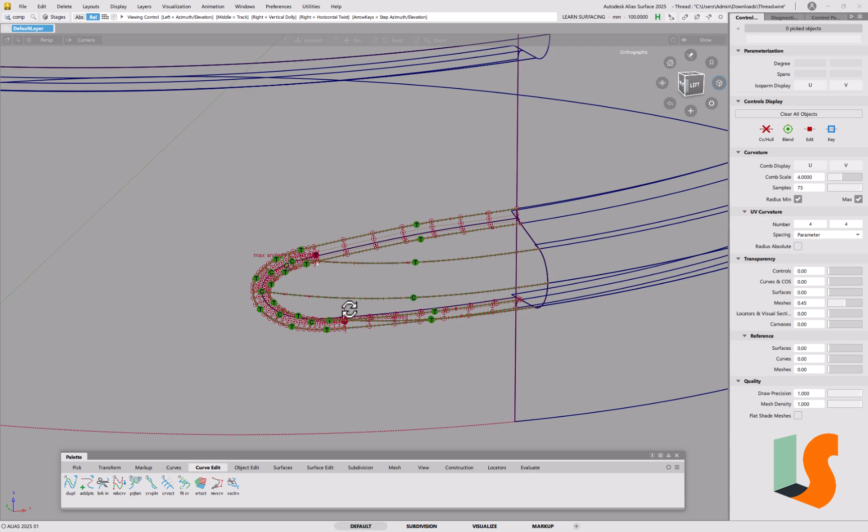This is an example of some filleting, and the question is, how do we get this to align? First of all, I'm just going to create a new layer, and put the stuff we are interested in, which is just this area here, and we can remove the rest of it.

So I'll put that in another layer. Probably did that round the wrong way, but never mind. Okay, so we're just looking in here. Also notice you get these light symbols here, which you don't actually need, so I'm just going to toggle those off. They're just interfering with our view.

So this looks really good. Everything's aligned apart from those two ends. Now the big, oh no, I've just spotted something. There's only position here, so let's go and have a look at that first of all.

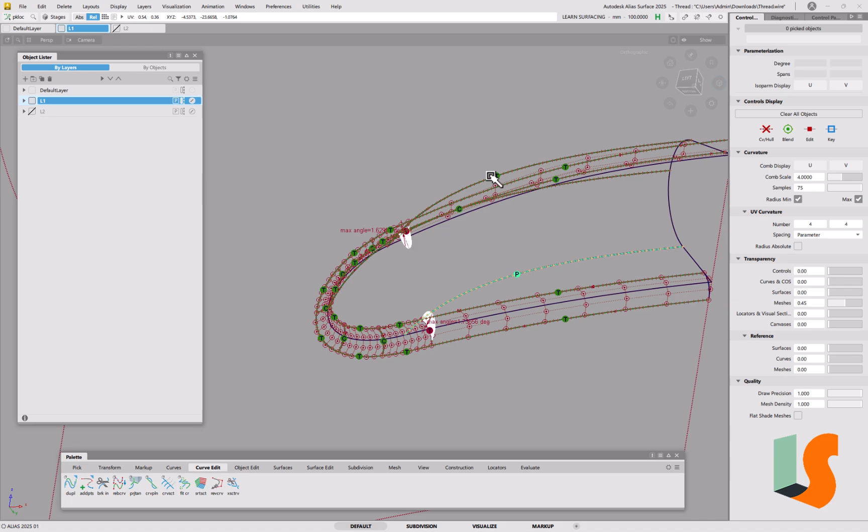And then I'm going to go into the information window, and I've got a hotkey of I here to save me a bit of time. So if it just says P and I want to find out what the tangency is, I can actually go into here.

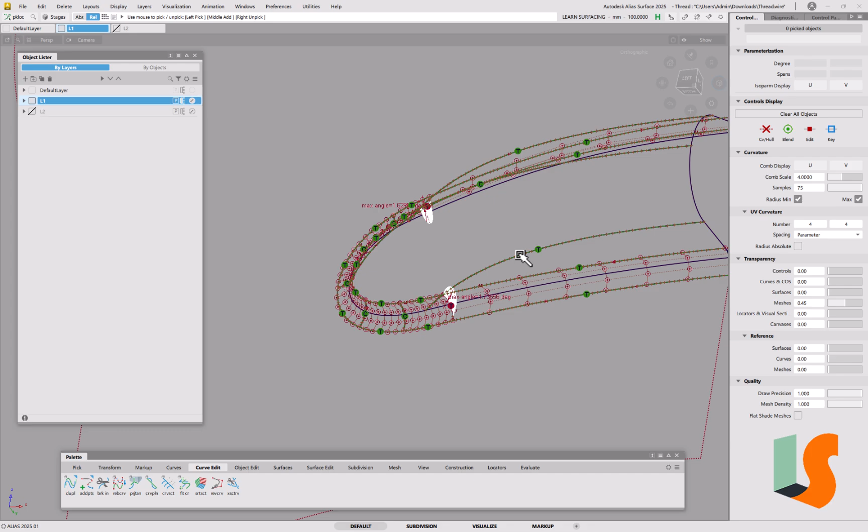So tangency wise it's okay, it's just the locator there wasn't quite correct. Now I'm wondering if that's curvature aligned. It isn't. So there's nothing wrong with that if that's what you wanted. So if you want tangency there, that's fine.

And I noticed that these fillets are tangent aligned. Again, there's nothing wrong with that at all if that's what's required.

When you're running a fillet over another fillet, you will find that if this is only tangent, so you're running this edge across a tangent edge here, then you will have much more difficulty trying to get that to align than if that was curvature aligned, or if it was G3, it would be even easier.

It seems counterintuitive, and when I started filleting many years ago, or surfacing many years ago, I used to think that if things were tangent, surely that's easier than G2, but it's actually the reverse.

So if you have a choice in the matter, if you can make that G2, that would be so much better, because then you won't have so much of an alignment problem going across here.

So we'd expect these to be all tangent around here, which they are, and we've got curvature alignment on the ends. Now when you get to this end here, if we can get tangency there, we'll be lucky.

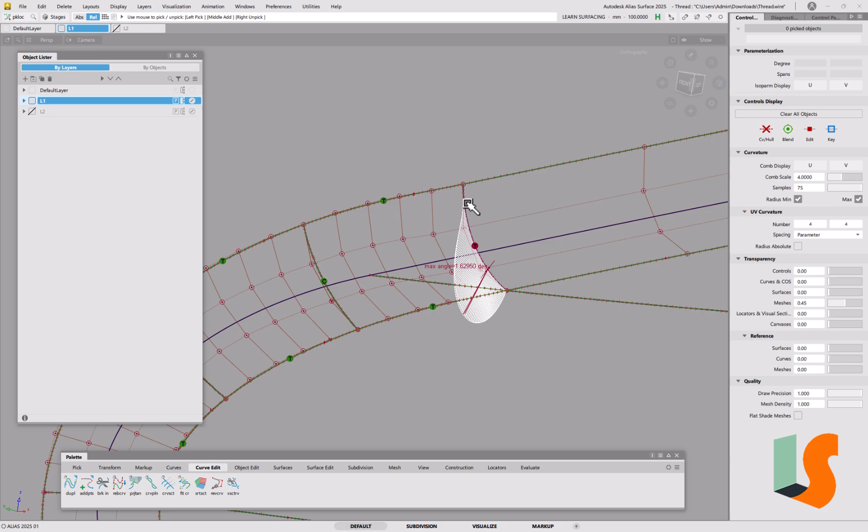And even if this is G2, you'll often find in this situation that you can only get G1 across that end, and as long as the highlights look reasonably okay, then it's okay.

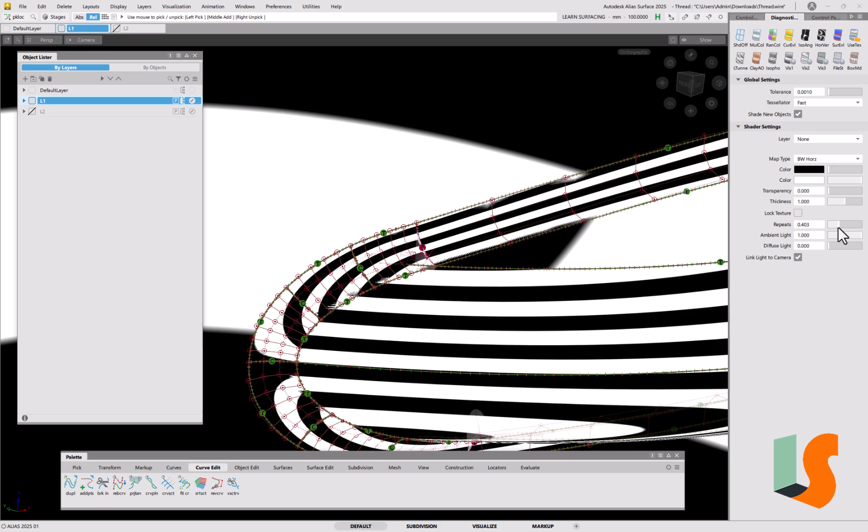I mean, here, because we've got tangency only, if I go into the highlights here, let's put those ones on, and I'll just reduce the number of repeats, so we've got a few less lines. You'll see that because we've only got tangency, we won't get continuity of the curvature across this boundary or the highlights. That's not wrong, it's just a feature of it being tangent continuous.

If it was G2 continuous, we'd expect that to flow across. You can see the same thing here. The highlights will come in and go off at a different angle, and that's why often you want G2 continuity. But it all depends on the size of the geometry and lots of other factors, like who your boss is and what they want you to do, basically.

So I'm going to persevere with this, but just to let you know, this is going to be difficult. So I'm making my excuses in advance, but this is a very difficult situation.

In fact, it's probably going to be impossible to get tangency across there, and the reason is partly because we've got tangency only on the edges, and like I say, if there's G2 everywhere, we're more likely to be able to get tangency there, but G2 is unlikely.

But the other thing that's happening here is that this edge comes along here and then goes off at a different angle. Again, it's sometimes unavoidable, and in this case it may well be unavoidable because we're coming in at quite a shallow angle here.

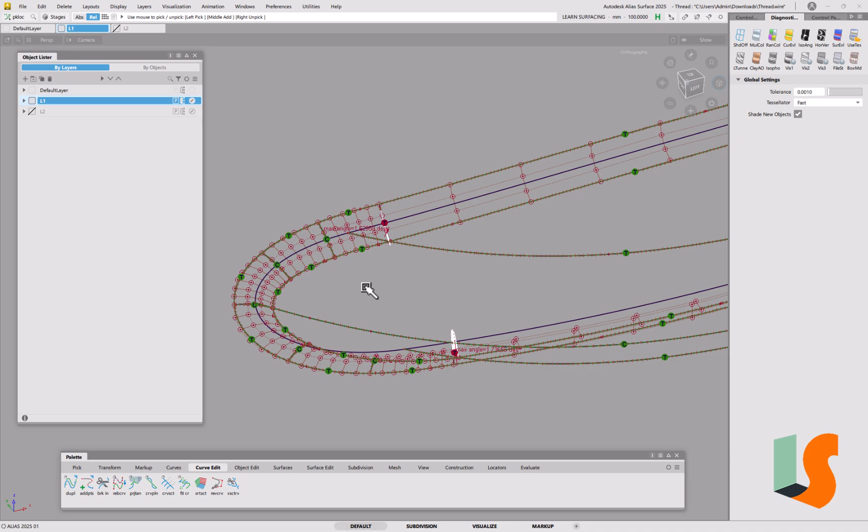If we had more of an angle on there, then what I would say is that we should actually make this edge flow into this one, so we could make that go across. In fact, that's probably going to be the only solution where we're going to be able to align that.

Now if I just want to try, I mean, I'll try and align this, and I hold out very little hope of doing that.

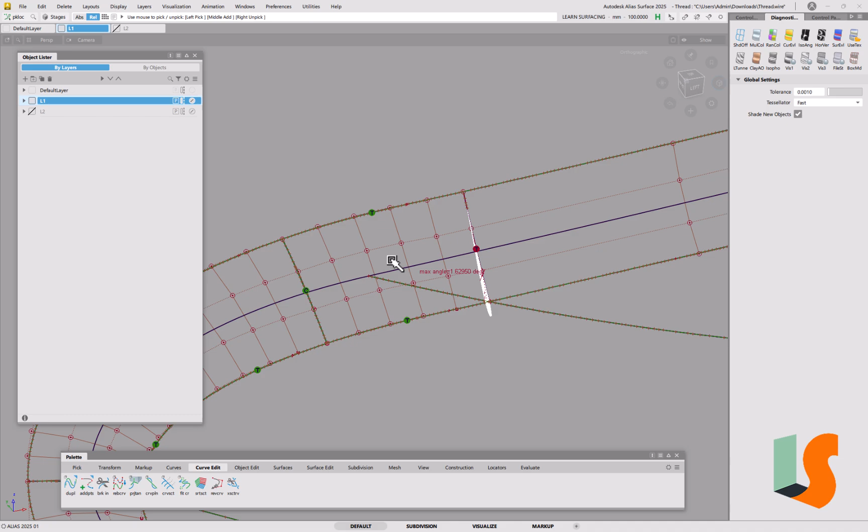One other thing we can do is, you notice the degree along this way is only 5, which is what the fillet function gives you. If you want, we can increase the degree to 7, that's usually the limit on what we're allowed to do. Now I'm using Alt and D here, very worthwhile knowing, because you can go up here and change the degree, but I can also do it here.

I can never see, or very rarely see, the symbols, but there is a U and a V symbol, I can just about make it out there. So I think the U direction's that way, which is this one. But I can't always see it, so I just guess which one it is. If I'm wrong, it doesn't matter, I can just undo it.

So first of all, increase the degree, and also hit the space bar, that would be very useful. Hit the space bar, and then we're just going to try and align that, and I don't think it's going to work. But when I align it, obviously it's only G1. That's the maximum I'm anticipating being able to do. Very unlikely you'd get G2.

You wouldn't be able to get G2 on this situation. You might if these were G2. If they were G3, I would expect to get G2 across there. But here we're going to go for G1. If we can get G1, then I'd be more than happy.

So we're going for edge because it's edge to edge here. If you put project on by mistake, then what happens is you create a curve on surface there, right on the edge of the surface, which you do not want. So always have edge on.

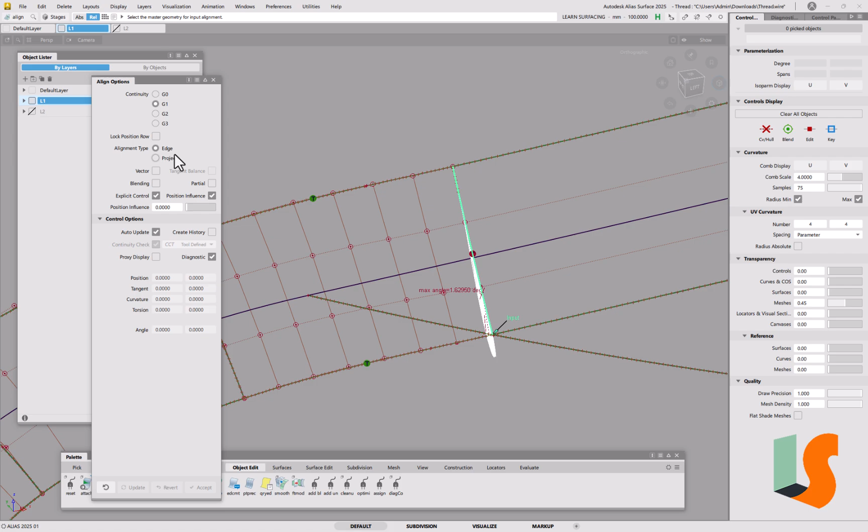Align is a really tricky function. You have to always keep your wits about you as to what settings you've got. So edge - I'm going to go and align that into there, and you can see that it's aligned it, and actually it's kept the alignment on that edge, which is good. But on here, it's thrown it off completely.

Now the other thing is to make absolutely certain that these CVs join up with the CVs on here. I need to put position influence of 1 on. I mean, it won't make any difference here, it looks like they're actually bang on anyway. And the other thing is that you tend to get a better alignment when you've got edge on, which I've got on here, or edge align, because the angle is about 1 degree there.

What I could try doing is changing that edge into skew. You can see it says start there and it says end there. So in this menu, I can go to skew, or I can do it here. I can click on that there, just in case that makes any difference. It's not made any difference, so I'm not going to worry about that. I'll just keep it on edge align.

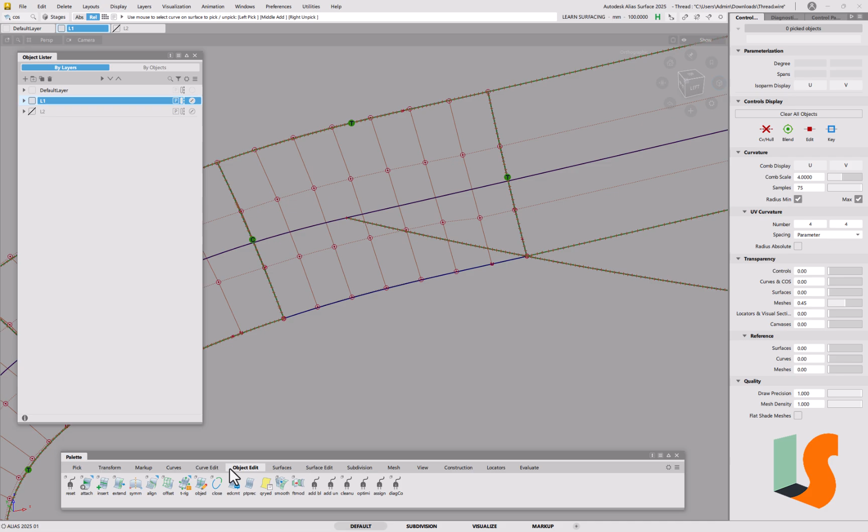Now, obviously we've got no alignment there, so what I'm going to do is pick that surface. Now that surface hasn't been trimmed, so we've got a curve on surface there that we can delete. So I'm going to delete that, and then I'm going to try again. I don't hold out much hope of this at all, but I'm going to go for G1, and I want to align it into this surface here.

So this is where we would use project, and I'll use project into the view in this case. So it's going to move those CVs only in and out of the view, and then I'm going to try and align it that way. And you can see immediately it changes the degree that way, which is what I was expecting it to do, to be honest. So it's actually made it a lot worse.

Now one thing you could try here is increasing the degree, because you can see that makes it more localized, and I can go up to degree 7 if I want to. So these surfaces here where you're going across this edge, that might be another possibility, is that we could do that. I don't really like that, because it doesn't really show the intent of that surface. Having that as degree 3 is quite clear that it's tangent.

Even without the symbols on, it must be tangent on both sides, that's all it can be. If it's degree 5, you know it's going to be probably G2 on both sides, even without the analysis on there.

This one, we have no idea, because it's a higher degree. So I don't really like doing this, but sometimes it's just what you have to do. And I still don't have that much hope that this is going to work either, but I'm going to try this. So I'm going to align it that way with project on, and then I'm going to go back to this edge, and you're often going backwards and forwards between edges, and I'm going to align that again.

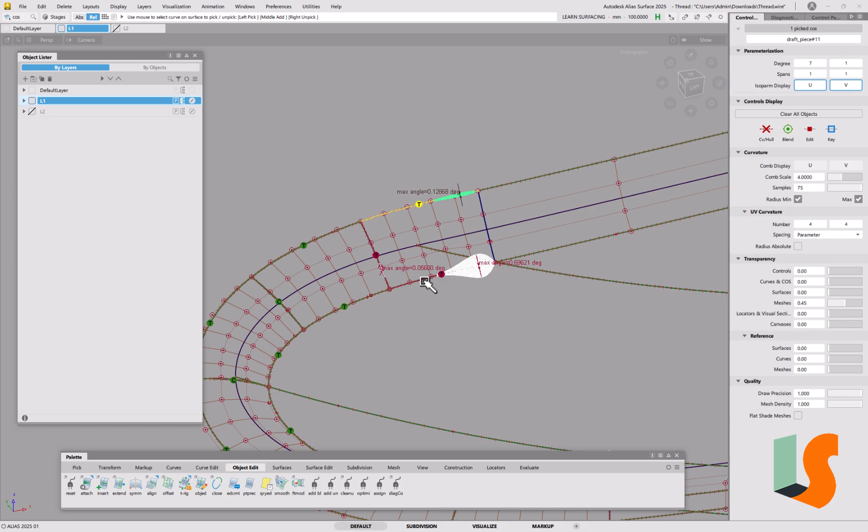So the other option that we've got, I mean, I'm avoiding at the moment making that edge flow, but that's the best solution in a way. But I want to try and use a sort of sledgehammer approach, which is what this is. When it comes off at that angle, this is a sledgehammer to try and fix this. So we're going to try and detach this and make this a smaller fillet. So do something like that.

Again, it's not very nice, and you will find when you look at this that these CVs, if I do get this to align by some miracle, the CVs here will be quite horrible going across that boundary, and the highlights will be quite horrible, but at least it will align. And so let's just try and do that again. So I'm going to start off by, let's align this end first of all. So I'll make sure I've got edge on, I've got position influence of 1 on because I'm edge to edge here, and I haven't got history on. And then we're going to align that end to there.

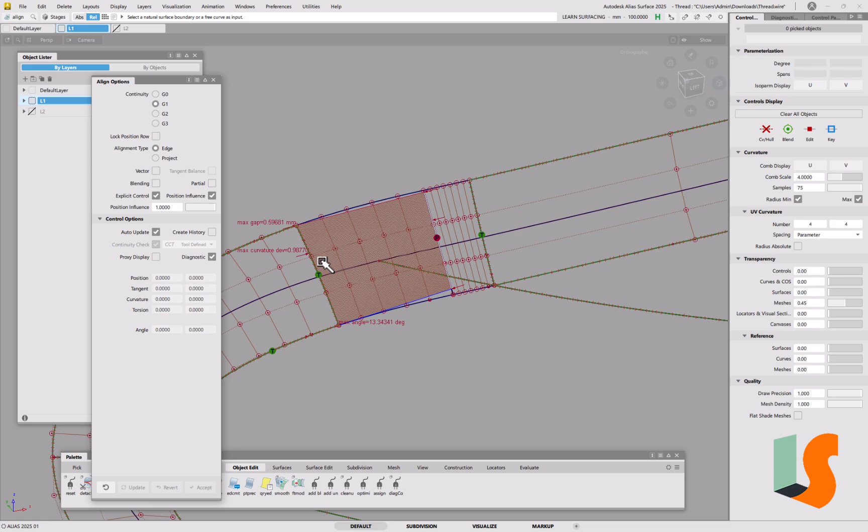Now this, I'll explain what has happened there. On this end, this surface here, we can make that degree 7, and we should do, because we'll need every single CV that we can get around the area to get this to work. Now what's happened on this end is, because I've used detach and I had a locator on the end already, the system is confused. So it thinks there's a position that this end and this end are connected, which of course they're not, which is why we've got a ridiculous display here.

It's saying the position, if we can find what the gap is, it says 0.6 of a mil. So this is tiny geometry, but it's saying the gap between there and there is 0.6 of a mil. We're not interested, and it's just because we've used detach. It always happens like this. It's not intelligent enough to actually know that we've detached it and that it should update the curvature here.

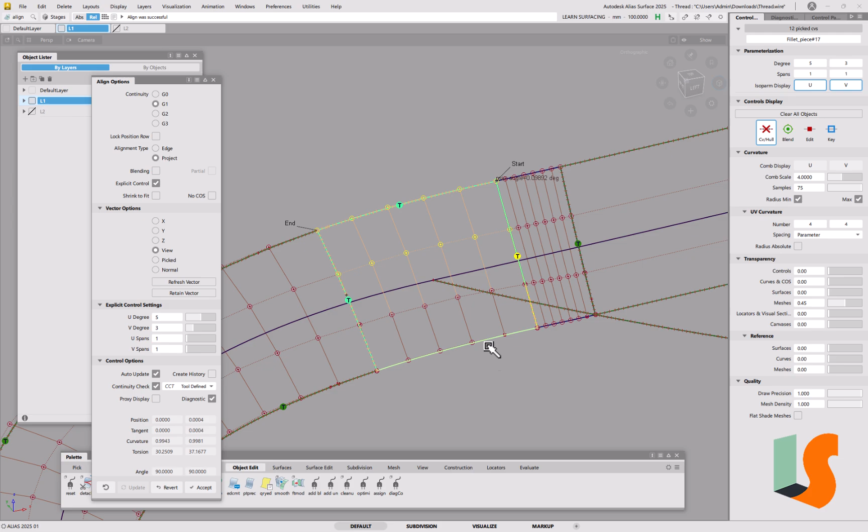So what I'm going to do there is put the curvature analysis on there, just so we can see that that's still continuous. I know these edges, we haven't got a curve on surface there, so we need to go and align those. So I'm going to do the one that should be fairly easy. So I'm going to have G1 project in the view, that one there, and this one here. So that should all be fine. So now we've reduced the problem to this area.

So I'm going to go back to edge. So we've got to have our wits about us as to what's going on here. So we've got to have edge here, not project, otherwise this will fail. So at most I'm going to try and get tangency. If I can get tangency, then on that one, curvature would be no problem. It's this one that's going to be the problem. That's only going to get tangency.

So on these edges, again, I've got to make sure I'm picking all the right options in here. It's not easy. So we're going to project that one onto this surface here. That one is no problem because it's not going across an angled edge. And so this one, let's see if that one works.

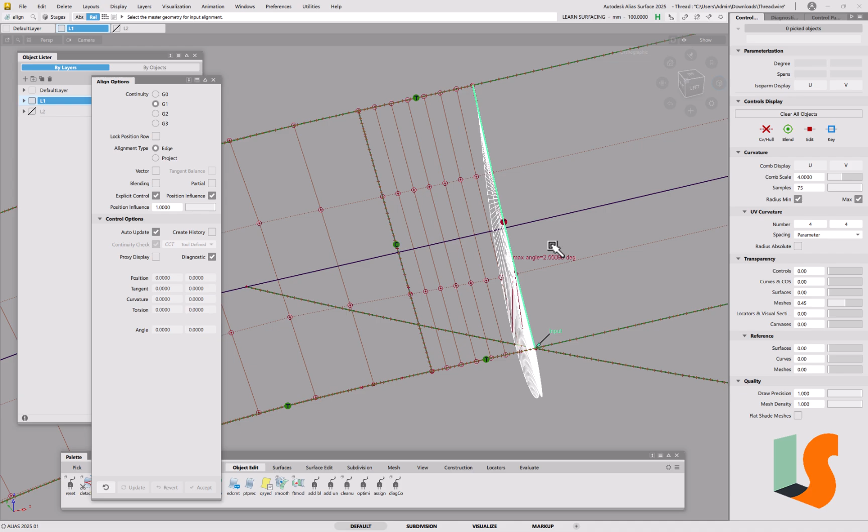That's even worse than when we started. And what we could try there, so I've got project on with view on. Okay, yeah, so let's go back to this edge. Now this will be very sensitive to these CVs, you can imagine, because this is such a small distance here. The tiniest movement of those CVs will affect that edge. So let's try G1 on that edge.

In case you're wondering that this seems like a very long-winded method, it is, and there's no way around this. This is how it does things. And whenever you've got an angle coming off like that, this is what's going on. But the good news is we're now down to 0.25 of a degree on this edge here. So we have reduced it significantly.

We can also try just increasing the degree. So I'm going to put history on here, with auto update on, because then as I do this, it should update. Although, no, it's not going to have any effect, of course, is it? So on this edge, let's just go for degree 7. Because there's every chance that we'll need degree 7. If we don't, we can just back off that a bit. Now, so we've just got this 0.25.

Now, usually, if I delete that curve on surface, this is the way to do it. Usually, the way is to delete the curve on surface and then to use project again. If you don't delete the curve on surface, then you end up with multiple curves on surfaces, and then you get confused about what's actually going on here. Now that's not actually helped there.

We could try changing the projection type. That's marginally helped, but not very much. So normal is just doing it normal to the surface locally there. Now that hasn't helped here. So what I'm going to now try and do is, what we could do is make this surface here even smaller. Let's go into locator.

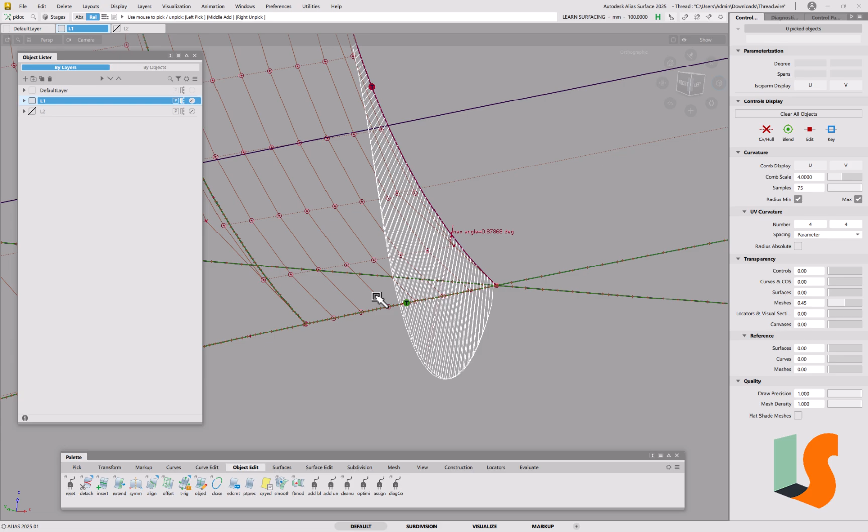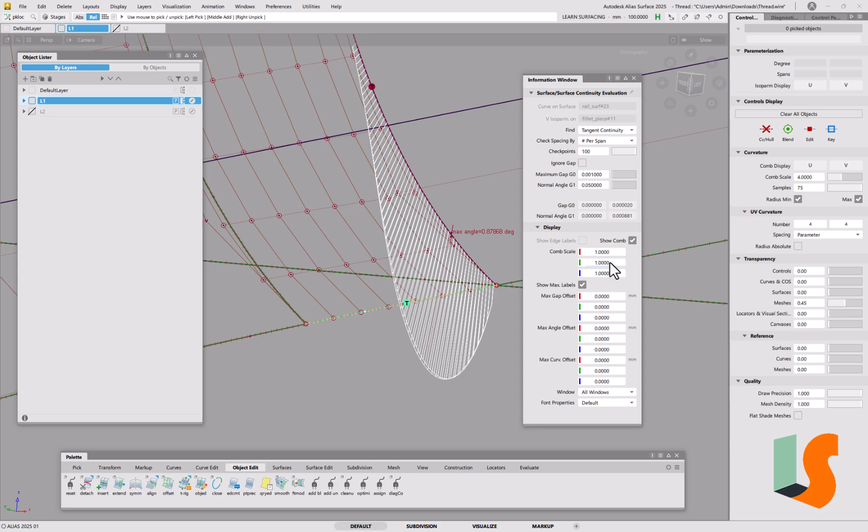So I've gone into locator. Sorry, I didn't explain what I was doing, but I've clicked on I to get to the information window, which if you don't know where that is, it's under Windows, Information Window. But if you make it a hotkey I, it's just so easy to get to, and it's so useful. Now on this edge here, I've picked this lower edge. I want to see what the tangency is doing. So I've got this scale option here. I'm going to leave that alone for the time being.

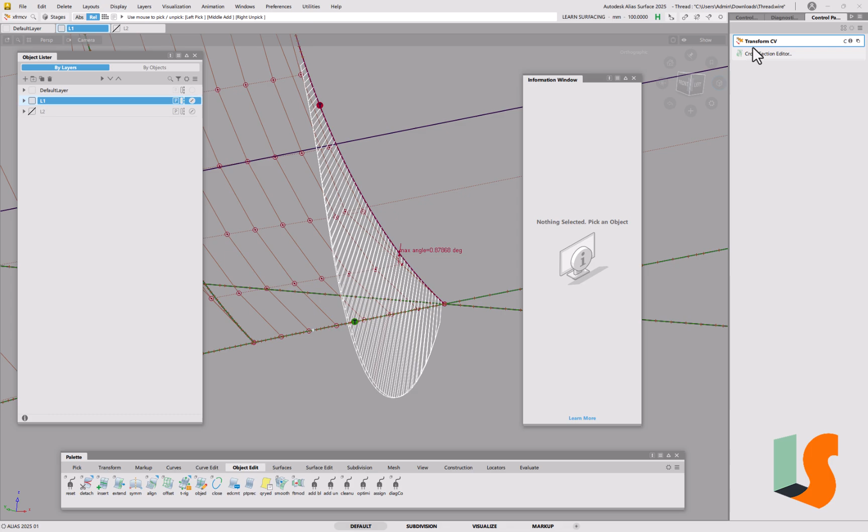But if I go into transforming my CVs, again, I've got this on a hotkey C in my case. If I don't tell you what I'm doing, it's under here, Control Panel, Transform CV. So if I click on C and then press the space bar, I get the function up. So I'm going to put on lots of mouse sensitivity, and I'm going to move CVs normal to the surface, and I'm probably going to have a lot more than that. Let's go for 1000 as my mouse sensitivity.

Now if I click on this point here, that's going to affect tangency that way, and also here. You can see the worst tangency on this end is here. This is the problem, that trying to align it in this direction is affecting that point, trying to align it in this direction is also affecting that point, and the two are battling each other. So let's see what we can do if I manually move that.

Can I keep this green? It won't. It's definitely not going to happen. It starts to deviate there. But maybe if I get the angles about the same on both sides. So I can't move that point anymore. It's affecting that side, and I'm about the midpoint of the two.

So I'm going to move along to the next one, which will also influence that, but by a lesser amount, and I might be able to get rid of some of that angle. But of course, what then happens is I take it to a point where it starts to move up here. So you then end up going to the next point, and it's a bit like trying to sculpt a balloon, where you push one bit of the balloon and another bit of the balloon pops up.

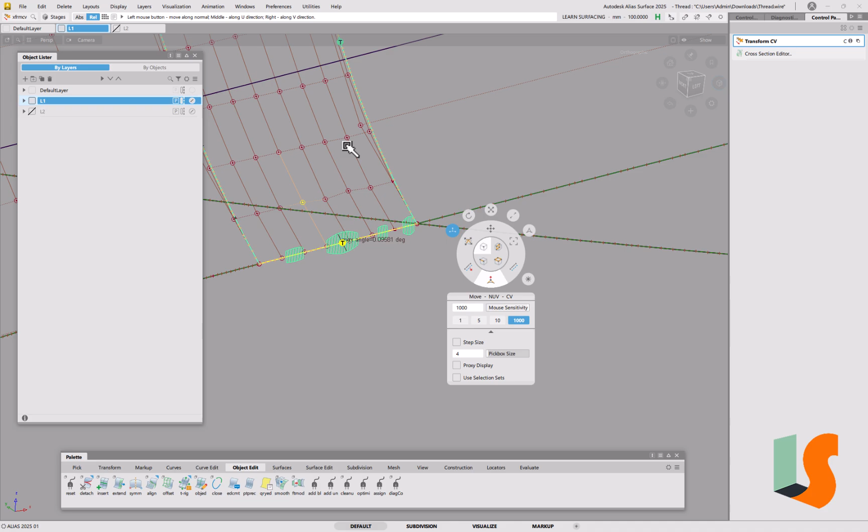But if you want to keep that curvature, of course, you've got to avoid the first 3 CVs. You can only move this one. It's the last one you can move. So it becomes very problematic. So I think if I spent another hour or 2, I might be able to get that to work. I'm not going to even bother to try the other one because it's the same principle. Now, as I say, the other thing we could do is just make this even smaller. So if this wasn't working, I might give up at this point. I'm dangerously close. It's less than 0.1 of a degree here.

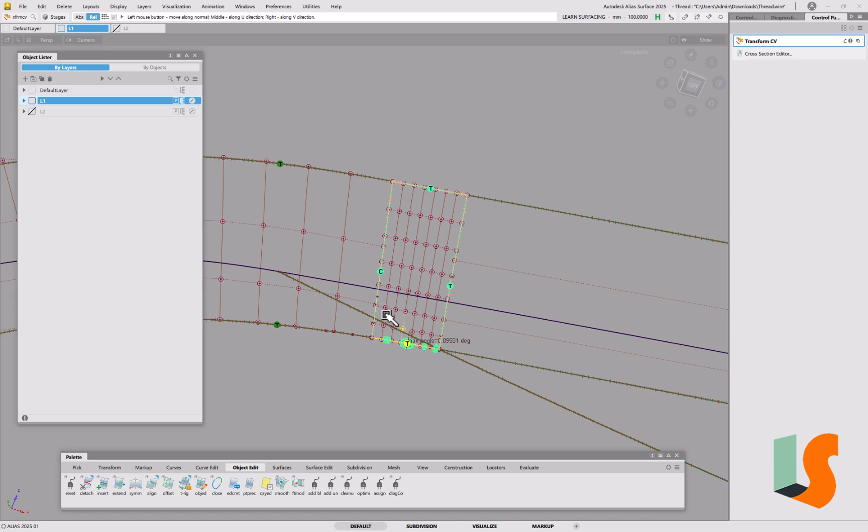But if I really have given up on this now, it's too much manual effort, then what we could do is just ideally go back to the original surface, or we could, if we wanted to, let me just save this somewhere. So I'll just call it thread 01. So if we've got to that point and we thought, oh, I can't be bothered to do this anymore, this is not working, what we could do is extend this backwards, so I'm using extend here, and then we can extend this. Obviously the diagnostic there isn't then right.

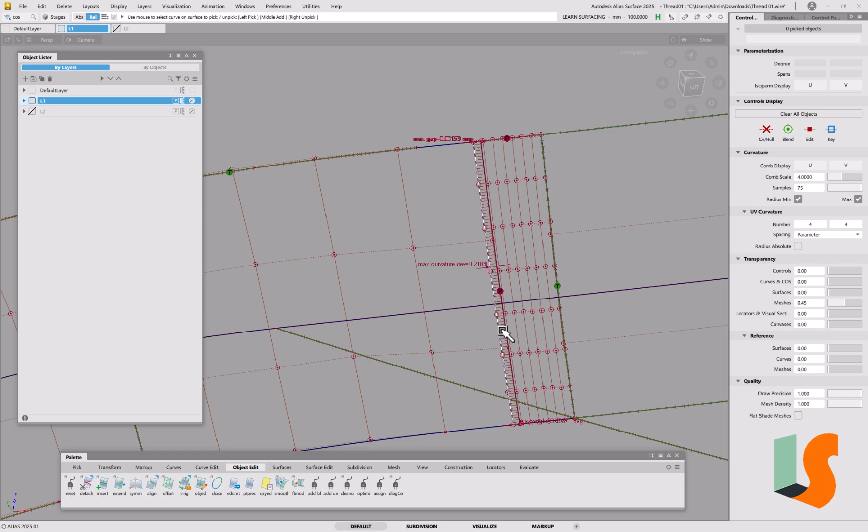Also the curve on surface here, we've got a curve on surface which goes across from here to here, not very easy to see. If I put edit points on the curve on surface, you can see there's an edit point there and one there. So we actually want to get rid of that. And we also want to get rid of this one because it doesn't line up with the edges that we've got. And we've also got overlapping edges, which I've done deliberately because I want to trim one back to the other, or trim convert it. So let's go into surface edit, and I'm going to do a trim convert.

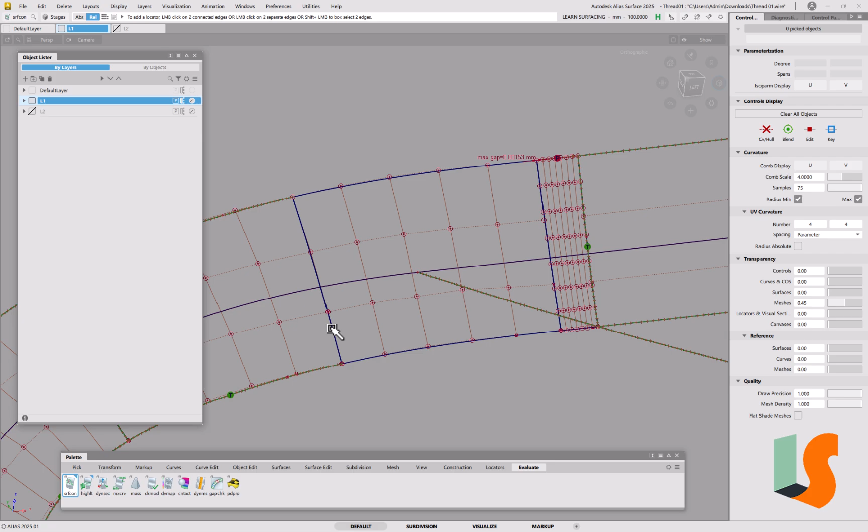This one, project in the view, or normal, doesn't matter. So we've trim converted that, so we've got a new surface there. Now the chances are that won't be entirely aligned now. So I'm just going to go for tangency there. Oh, again, on this side, we've got a curve on surface which only goes to that point. So it's really important that we get rid of these old curves on surface. Otherwise you end up with multiple ones which are really not very good.

Thinking about it, this needs to be curvature, doesn't it? That's what we were working with. So I'm using the information window there just to change it. So we haven't got a curve on surface there, here or here. Now I've just trim converted that back to that edge. So I've just made this smaller, so that hopefully we'll be able to align that. Let's go into surface continuity here. See if that's got curvature. Very unlikely.

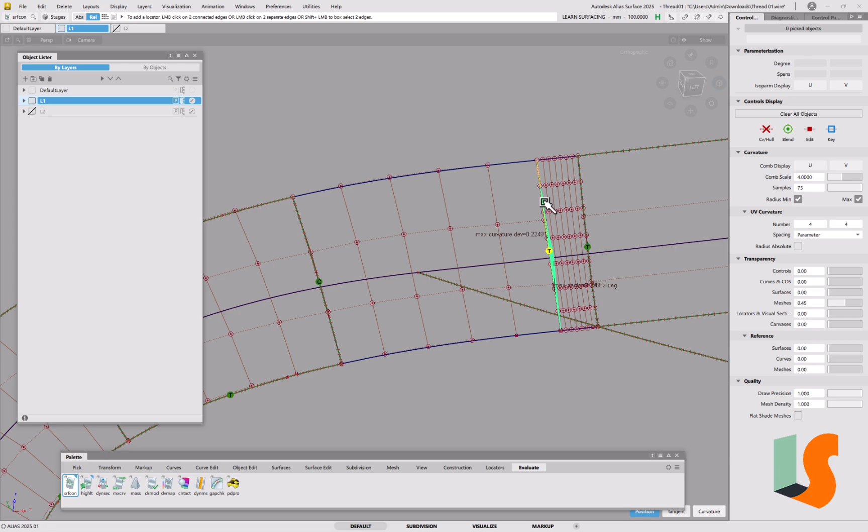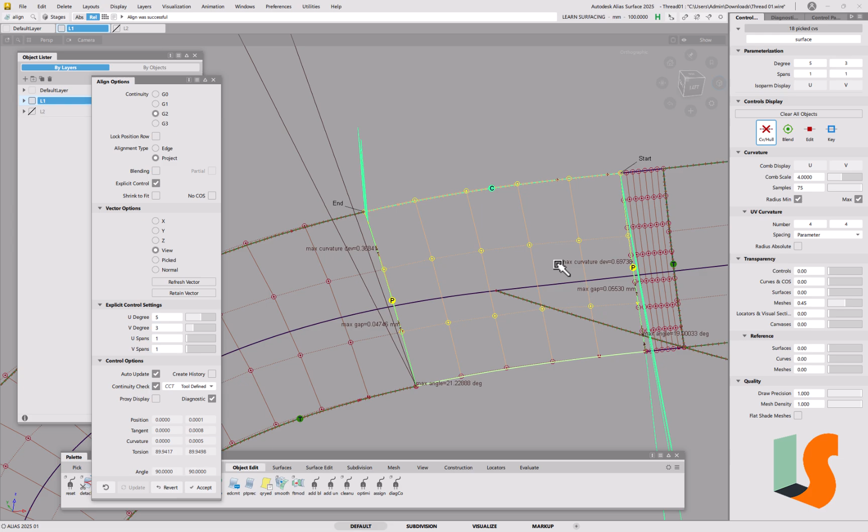So I'm going to first of all align these edges here. So let's go into align, and this is going to be G2, project in the view, that one. I've left curvature on, so we've got all sort of dubious analysis going on there, which obviously we don't want. We want it on G1 only. See, all of these things you've got to remember all of the time, which is a tall order. It's not easy to do.

Again, this one's G1 into those edges there, and then I'm going to use edge on here and align that with curvature that side. So this tangent is worked out there. We've still got this error on this side. So G1, not surprisingly, G1 into here. Now this should be a lot closer to start with. Now it's down to 0.14, so by making that smaller we've got closer to a solution.

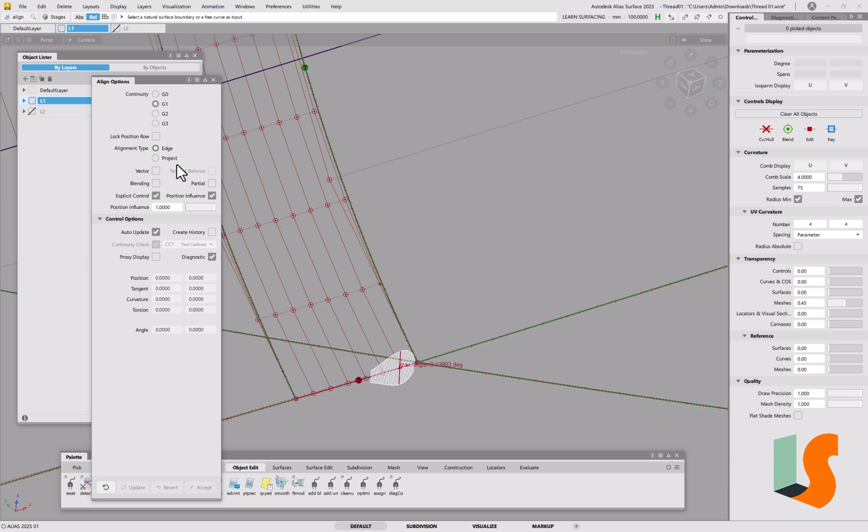Now before I said usually the best result on an edge like this into another surface is to delete the existing curve on surface and then use project, but sometimes edge will work, but I can't tell you when. It's one of those that you've just got to try. So let's just do G1 edge and just see if this works. So it's not working at the minute. Maybe if I change the position influence down to 0, it might improve things, but no. But there are times when that works. It didn't make it any worse anyway. It's still 0.74, which is what it was before, I think.

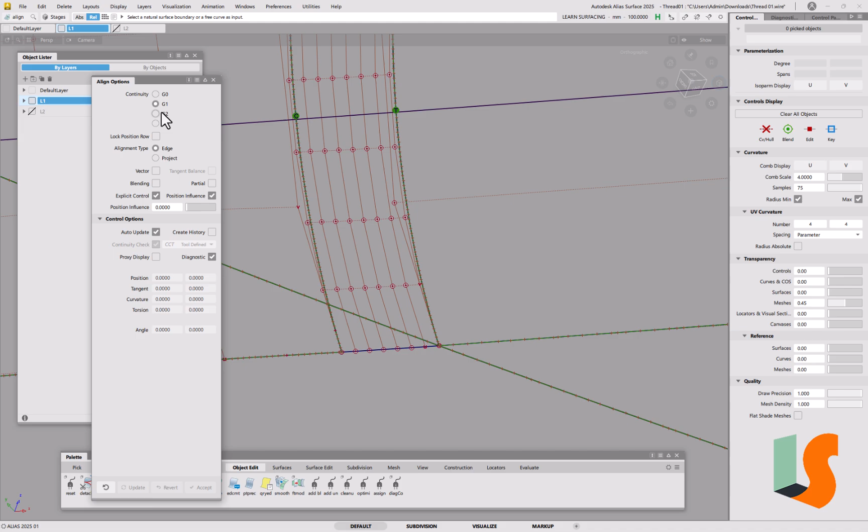So let's just get rid of curve on surface there, and then this is going to throw this edge out. Of course, G1 project there, and I'm going to do it from the view. So it's actually made that worse, but let's just live with it. So now I can't remember. I think it was better when I've got that aligned. So it's an iterative process. There's no magic button that's going to give you this. So that's got down to 0.13. So that's dangerously close. This is aligned. So let's go with this.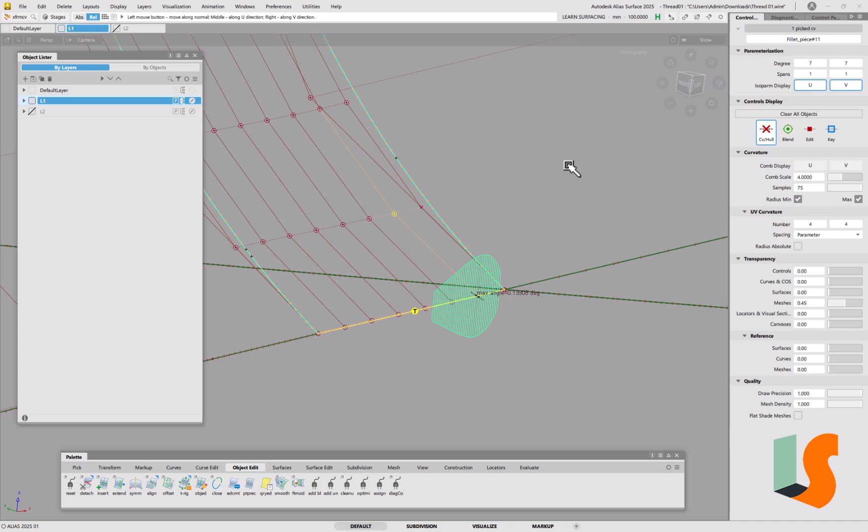And then we're going to go and start moving CVs around again with lots of mouse sensitivity on. So the first one there is where the maximum error is. Now I've been moving this point normal to that surface. There is another way we could move this, which would have an effect, and that's to move it left to right, which if we moved it left to right by sliding it, then it has some effect on here, but doesn't have any effect, or very little effect on here, because we're not moving it up and down. So I could try that.

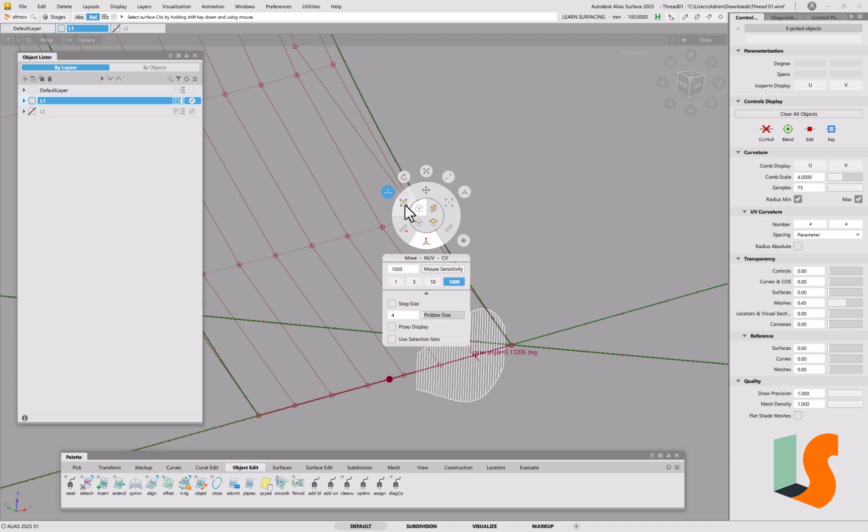I'm not holding out any hope really that this is going to have the effect that we want, but let's just try sliding that along. Now we probably have to put a lot less mouse sensitivity on that way, but sometimes that can affect things. But you can see I'm having to move it to a silly point there, which obviously we don't want, so it was worth a try.

So let's go back to moving it normal, and I've got to put lots of mouse sensitivity on here so it slows it right down. And I'll do what I did before, which is try and sort of balance it. So I've got about 0.2 on both sides, and then we can move along here, see if we can push that down to where we want it to be. It seems to be going, hopefully, in the right direction. Now it's popped up a bit further along, but we just counter that by moving the next point along. We're still struggling.

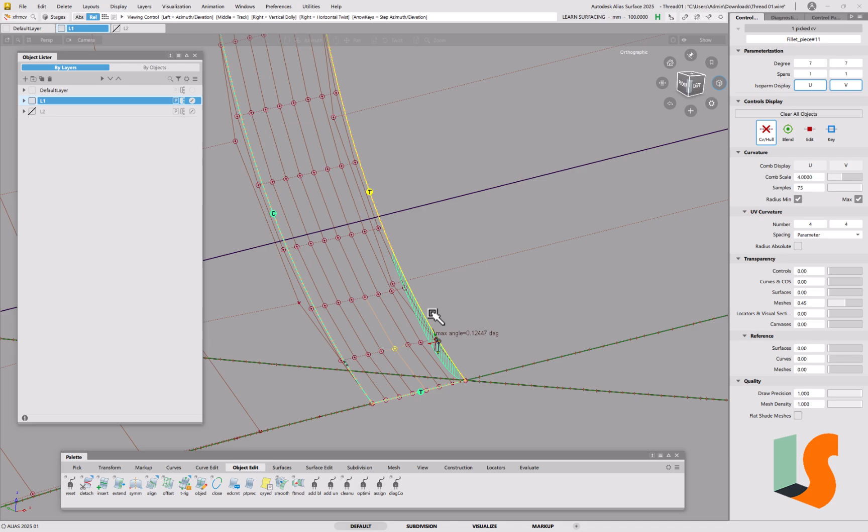What I'm going to do on the lower edge is do the other way of doing this, the better way of doing this. I mean, part of the reason for showing you this is to show you how tricky this is and how you don't want to be doing this. But the thing that I am not showing you is that if this was G1, this would be a heck of a lot easier, especially if you just accept the fact that you want tangency there. You'll find it a lot easier.

If you can do it with G1, then it'll stand you in good stead for being able to do it with G2. So I'm going to try and keep pushing that and pushing it until this goes here, and obviously this is gone off now. So we'll move that over here, see if we can just get rid of that.

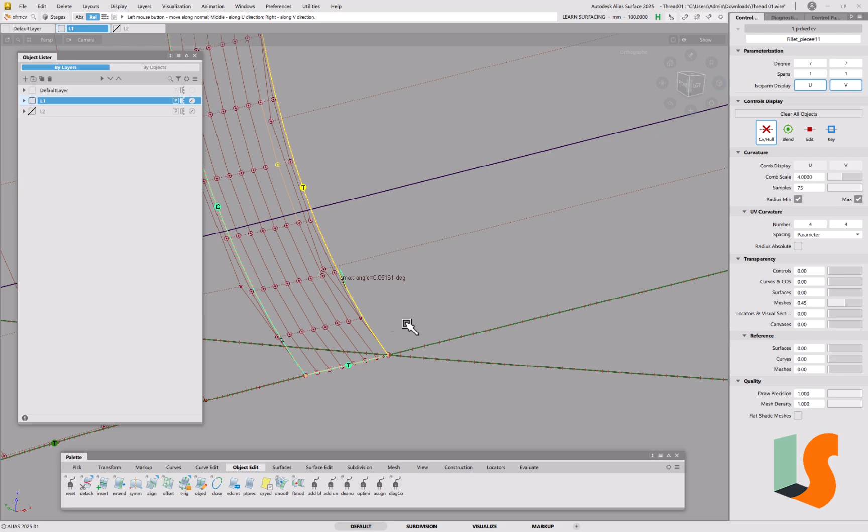And then it moves even further away, but now we're almost there, I think. Oh, there must be a little spot there, 0.051, so we're almost there. Now if it starts to flick from one direction to the next, all you've got to do is put more mouse sensitivity in. So let's make that 5. I've made it 50,000. That's even better.

That's probably too much. If it's too slow, then obviously change that. So I accidentally put in 50,000, not 5,000. But that'll just slow it down enough that you can actually get it to work. So you think, oh, that's great, that's brilliant. It's not brilliant, but at least it's aligned. So you've now got a model that you can machine or that you can 3D print.

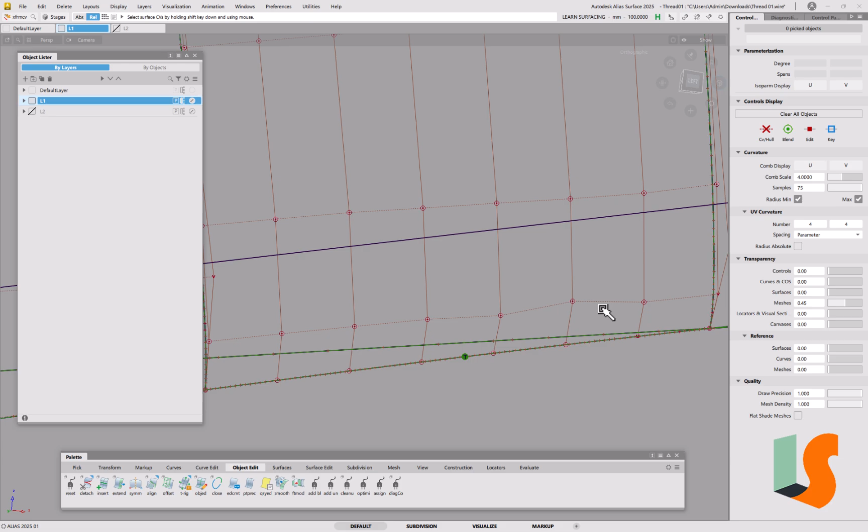If I look into this though, because this is going off at an angle here, what you'll find is these CVs are pretty nasty in here, when you're doing A-class work especially. If you're doing a concept model, it doesn't matter really, but then if you were doing a concept model, you wouldn't be working to these tolerances. So we're looking at sort of A-class quality here, and that's not nice at all.

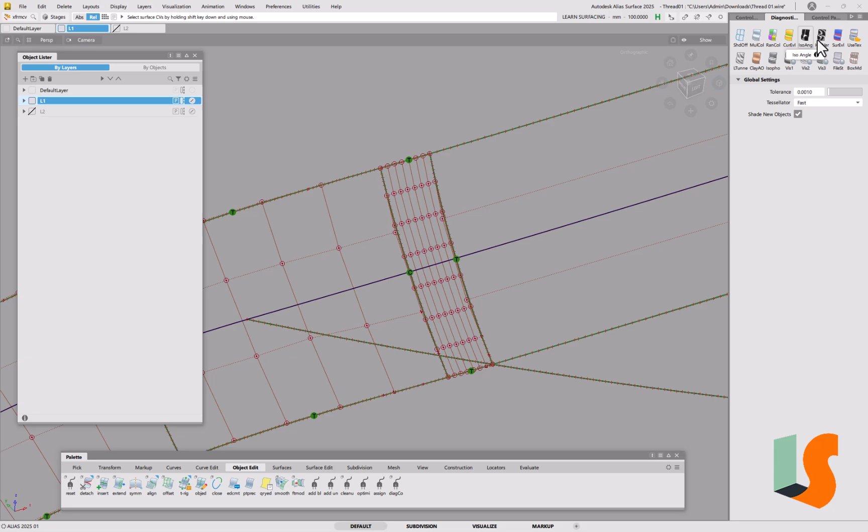Not much you can do about it. You might be able to massage those points up and down, but you'll still get a lump in here because of the fact that this is going across and this is coming off at an angle. You'll also see this in the highlights. But having said that, it's so small that we're actually down to the sort of tolerances of the highlights.

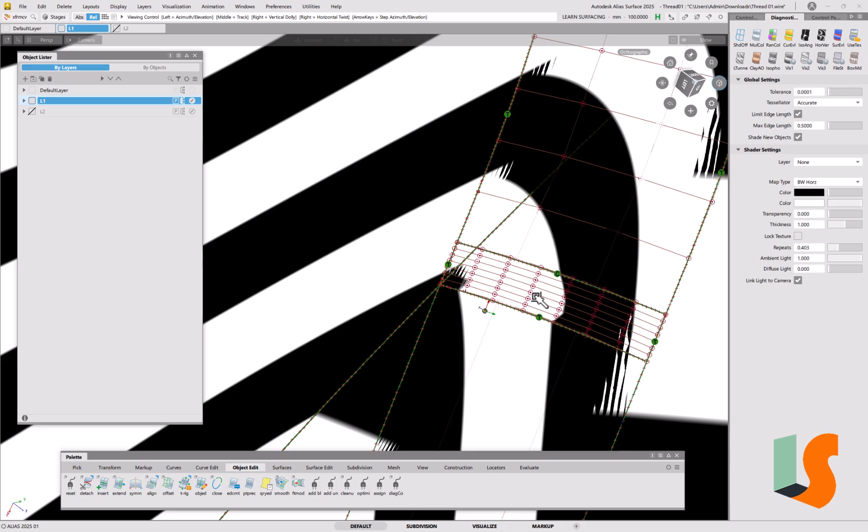In this area, we can change the tolerance there to 0.0001, and we could make the tessellation accurate, but it seems to be coming off at a funny angle there, and that's because that's just tangency. On this side we've got curvature, so it sort of flows a bit better, but this is what you'll get. You can't avoid it. That's what you're going to get.

So you can see it even from that angle. There's a sort of lump in the highlights there, but bearing in mind this is a tiny piece of geometry, you have to ask the question, does it actually matter? Now if it does matter, what I'm going to do on this end is try and do it a slightly different way.

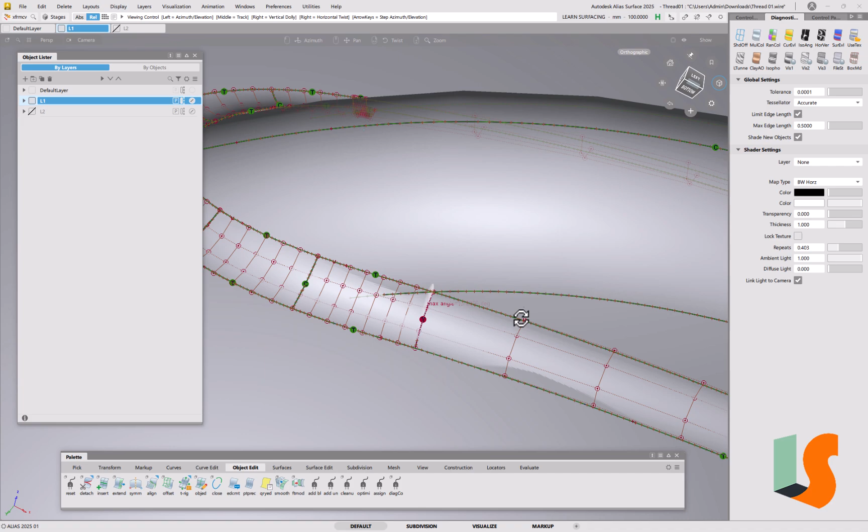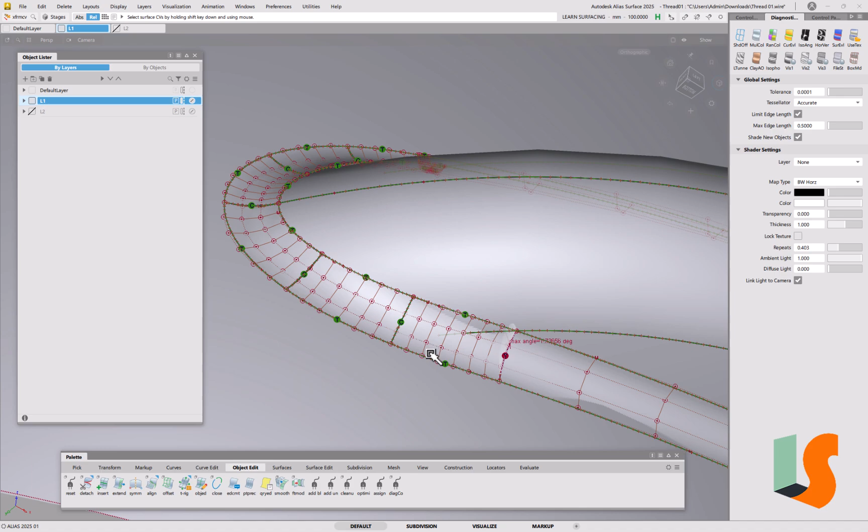So what we want to do is flow this edge in. Ideally it probably would want to go over here, but what you want to do is get an edge on this fillet here, which has to join up with that, has to tan into there, and then it comes off and ideally goes into about 90 degrees onto this corner here.

So I'm actually going to create another layer here and just put these essential bits on here, the only bits we're interested in. So this is just a different way of doing it. And as I say, if this was coming in at a less acute angle, if this was coming in down here, then definitely you'd want to flow that across. The sharper that angle is, the less inclined I am to do it.

You just have to accept sometimes that you go across at an angle. And sometimes I've found the solution is to put a small surface in that side and a small surface in that side as well, to try and get this to align as best we can. So I'm going to delete these curves on surface here, as I did before. I'm going to delete this one as well, because I would need to extend this surface out.

And I'm actually going to save this, which normally I'm saving every 5 minutes. I'm being a bit lazy and not doing that.

So what I want to do is extend this surface, and hopefully it'll go in the right direction. It's sort of deviating off a bit, so I'm going to undo that. And what I'm going to do is just detach that surface. So we've got a not very small surface, but a smaller surface that we're going to use to extend. So I'm just going to go back to here, say.

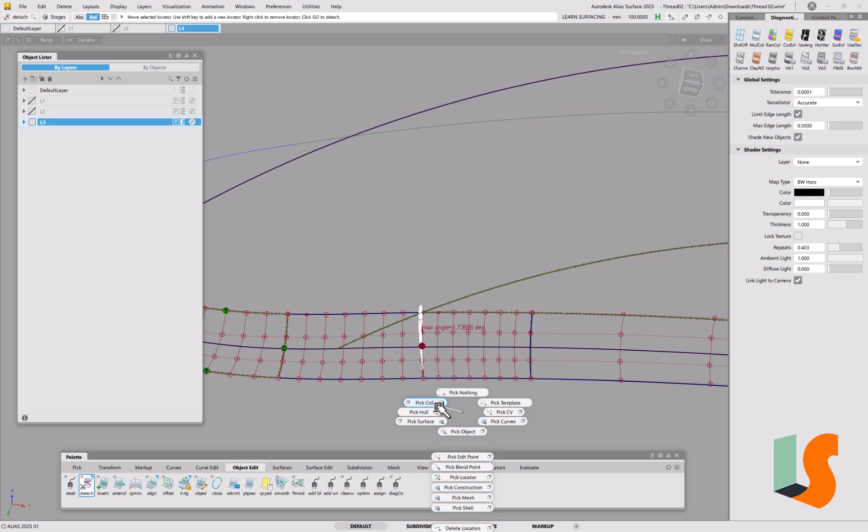So I don't want it too small, because if you make it small, the tendency is that it's more likely you'll get a lump in the highlights. I've got rid of that curve on surface there.

Now this one, if I want that to behave better, let's first put continuity on there. I haven't got a curve on surface there, so I've got nothing to compare that with, but I know that that was actually aligned. So with this one, I'm just going to project a curve on surface in that view.

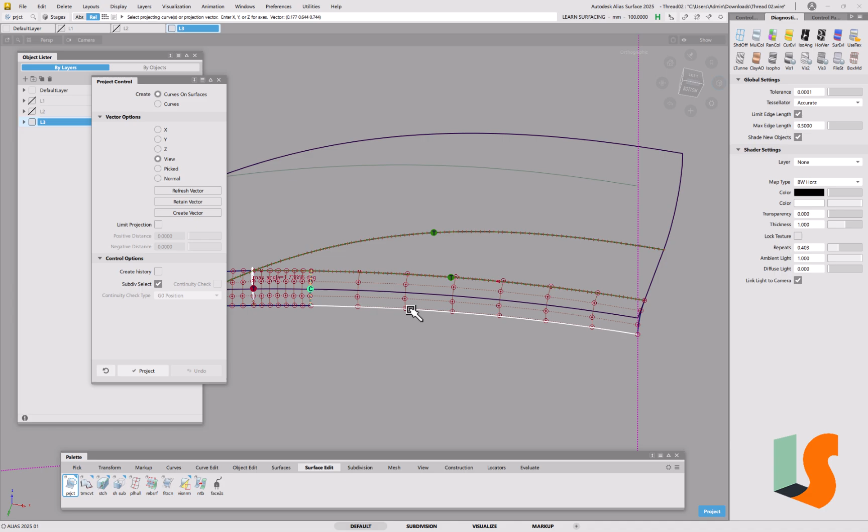Onto this one with that one. I haven't done an alignment there. I just want to check that we've got G1 continuity there, which we have, which is no surprise because I detached it, which is 100% accurate.

Now I want to extend this surface, and I might want to adjust the end of it. So let's go and extend that. Now if I extend that, you can see it sort of goes off a little bit there. It's pretty good. But sometimes the best solution, if you find it's going off a little bit, is to drop the degree right down. So I'm going to make that degree 3. In this case, I don't think it's going to make any difference, but sometimes you find that dropping the degree down, sometimes even to degree 2, means you have a more accurate result.

Now this one has lost its continuity here. So we've got a curve on surface there. Now, have we lost the curve on surface there? Have we or not? No, we haven't. We've actually got a curve on surface. It just goes all the way along there. So I can actually go and analyze that one.

So what I'm going to do here is just align that in tangency. It's probably because I've dropped the degree of it. Well, it will be because of that. So I'm going to align that into that edge. I'm not going to create a new curve on surface, I'm just going to use edge, and I'm going to use position influence of 0, which just means the CVs stay more or less where they are.

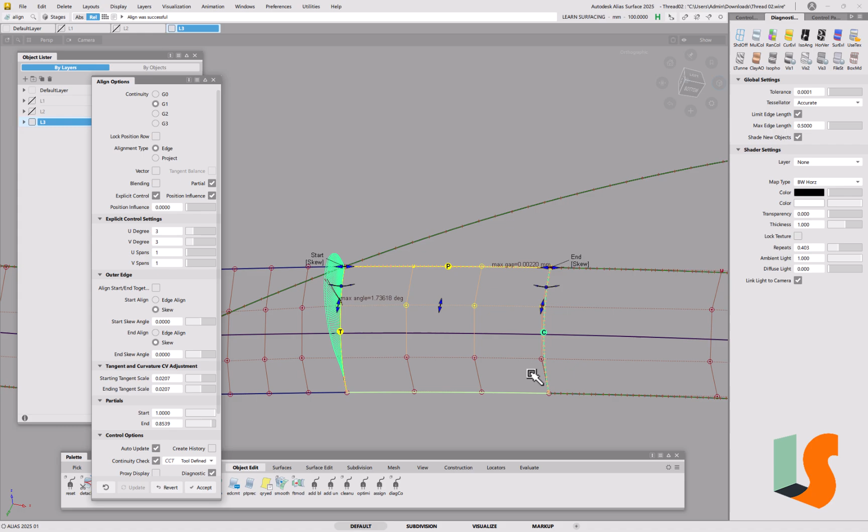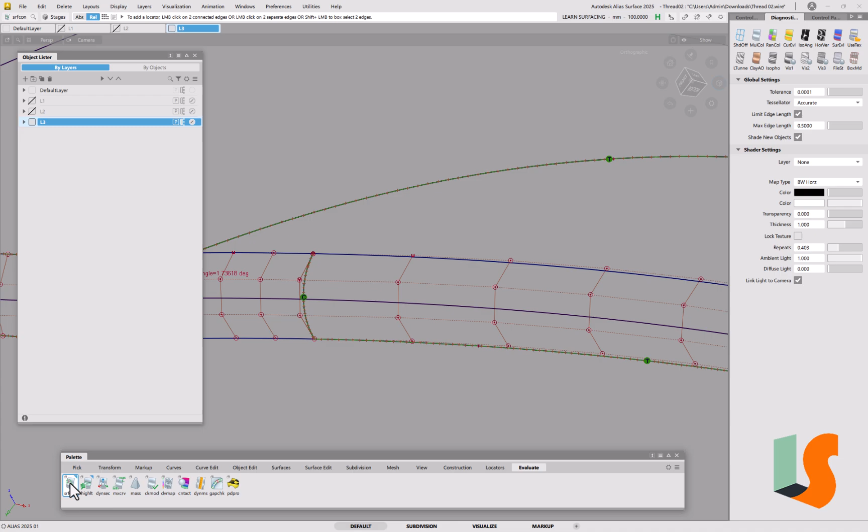So the solution there is to just get rid of those curves on surface. Now I'm going to realign these edges. This one doesn't need realigning, it just needs projection of the edge as a curve on surface. So I can do, I always pick the wrong one, that one. So evaluate, and we want tangency on there, which should be no change there, and that means we don't have a curve on surface there because I've just projected only that edge, not this one.

So this one I can use align on, and that will create me a curve on surface. So G1, project, view, or normal would do the trick. So we've now got that aligned there.

So now I want to extend this fillet this way. I want to extend it quite a long way. I'm going to get rid of that locator, which is obviously wrong.

So if we look at that one, if I go into the information window, you can actually see what it tells me, which is a load of rubbish, because obviously it's measuring between the two edges which aren't actually connected together. So I don't want that. I'm just going to delete it.

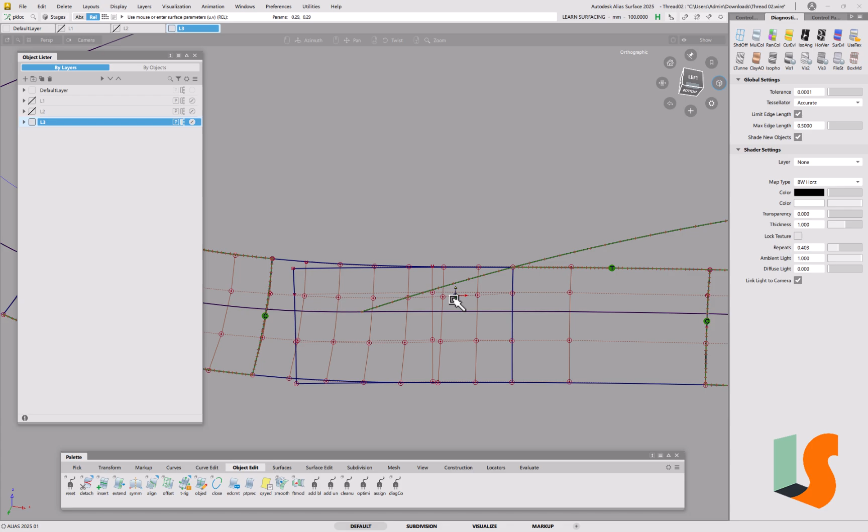Now what I do want to do, because this is deviating from this edge, I need this to join up here really, and maybe this isn't the best thing to do to extend that, to be honest. I think what I might do is put a curve in from here. So let's just get rid of that curve on surface.

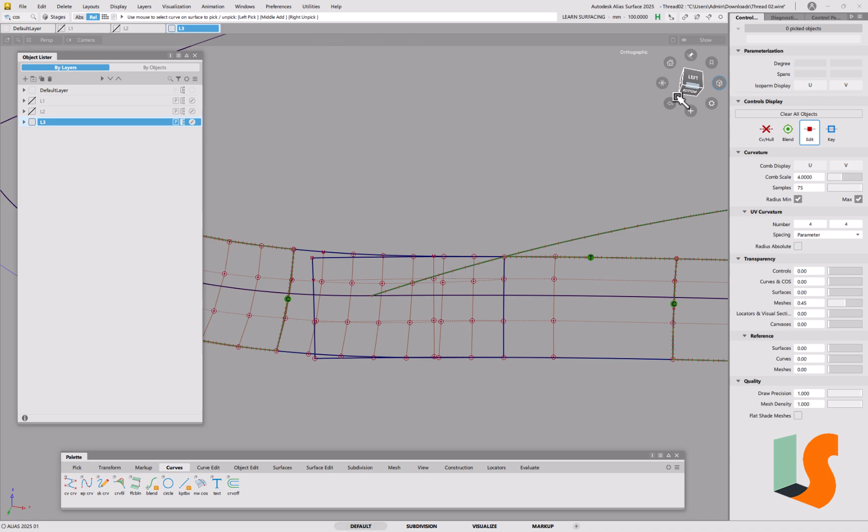The trouble with curves on surfaces is they are difficult to see, so I couldn't remember whether I put a curve on surface there or not. If you look up here, you can see I haven't, but you can also put edit points on if you're in any doubt. Curves on surfaces are one of the common errors that people make.

They produce multiple ones of them, not even realizing, and leave them lying around, and they cause havoc because you then end up measuring to them and you think, why is my surface not aligning? And it can be just you're picking up an old curve on surface.

So I'm actually going to extend this backwards because it's not going in the right direction. So what I'm going to do is create a curve from here to here. I'm going to use edit point curve. You can use blend curves if you prefer. I've just gone off them, and I just like everything to work the same really, and edit point curves work the same as every other curve, in terms of having CVs on and so forth.

So I'll make that degree 5, so then I can align that at both ends. Let's just take the CVs off there so we can see a bit clearer, and then I'm going to align that probably G2 at that end, because they're edges. It doesn't have to be G2 at all, of course, and it doesn't also matter whether I pick the edge or the curve on surface there.

The important thing is make sure that you've got one arrow. That means you're on the end point there. Now I could just make that G1. All it is just to create something that's the right sort of shape. You can see that because we're crossing over this area that we do end up with this little bulge there, which ideally I'd want to get rid of, but just for the sake of speed I'm going to do it this way.

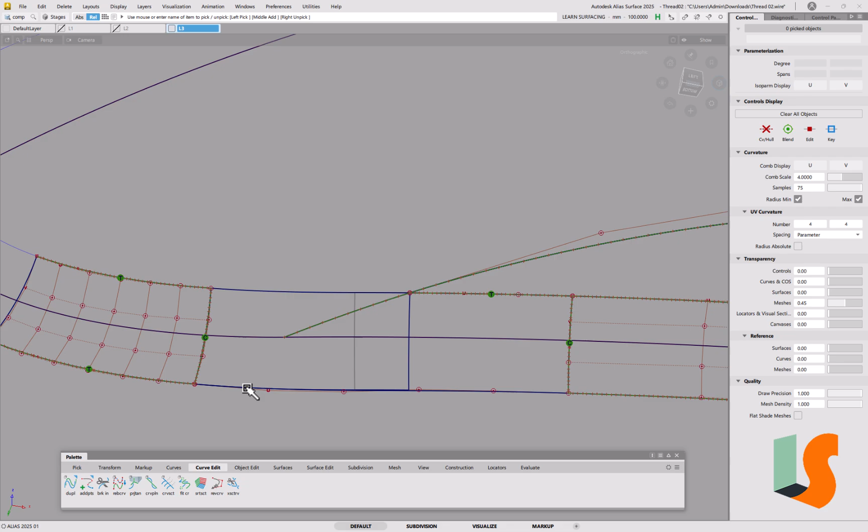And now I want to create a curve segment from this end to this point down here somewhere, I'm not sure where. So I'm going to go into edit point. Now we know that this is only tangent, so there's no reason for putting curvature on there at all, and degree 2 will do it. I don't tend to change the degree in the menu just because it's so easy to change it afterwards.

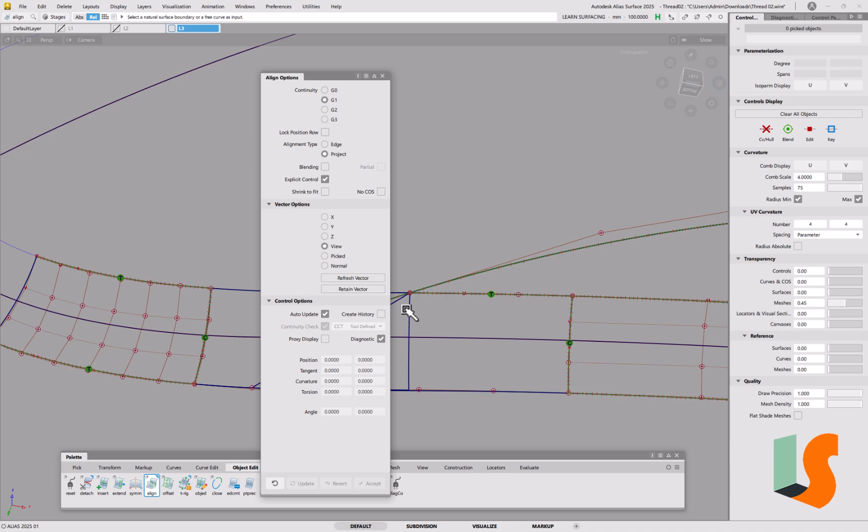So I'm just going to put something in there, I don't know where it's going to be exactly, and then I'm going to go into object edit. I'm going to align that G1 there into this curve, just see what we get, and then I can slide that along a little bit. Now this end here ought to come in, ideally at 90 degrees, doesn't have to exactly, it can come at a little angle.

I'm actually going to put in an extra CV there, so make that degree 3, and I'll explain why in a minute. On this end I want to put history on, and I want to put G1 on, because that means I can then slide it along that curve. So I've got history on there, slide that up and down, so I can actually make that coming in at

more or less 90 degrees. The reason I've put in degree 3 here is because I need those CVs. I'm going to basically be taking that fillet surface there, and I want to do a trim convert on it to this curve here.

Now if I do that, so let's go into our transform CV menu there. Actually, I'm just going to move those around freehand. Now, because I'm not in a particular orthogonal view, if I try and move that point, it's moving actually in the X direction, which might be fine.

But if you find that's a bit of a pain, you can actually set up a plane here, which might be quite a good idea anyway. But if I go into plane view and pick some point on the edge there or on the curve, whatever, so now I'm looking at that in that plane. Then I can move that point around with the left mouse button if I'm in the right function, so transform CV. Now I can move it anywhere I want to, which is more like it.

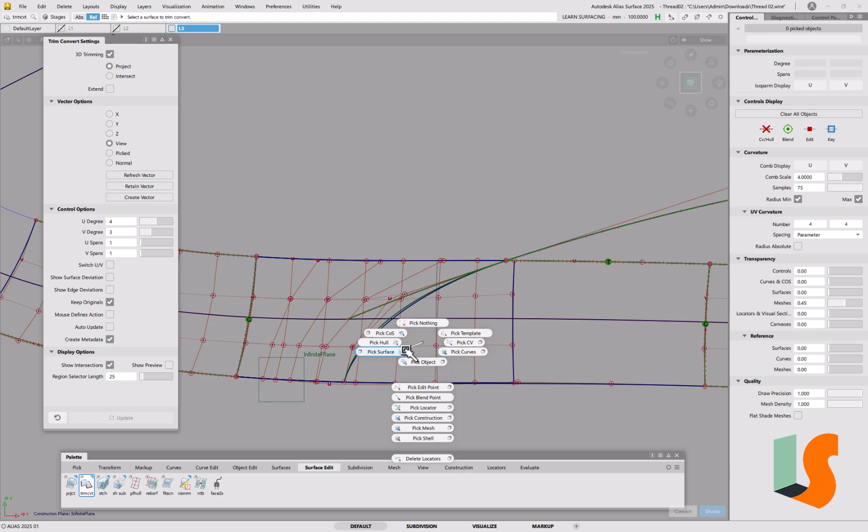So I've got the original one on there. I'm going to just template that, so you can see I've got a few templates there, which I'll get rid of later. This curve here might be an idea, probably is an idea, to get these CVs on this surface to sort of tie up with that.

Maybe if I align it though, be careful because that curve isn't actually aligned in tangency to anything, but we can do that if we wanted to. So if I said object edit, we will have to manually tinker with these surfaces, I think, to get this to work. But if I align that, and I'm going to use edge, and it's got to be position influence 1,

in other words the CV is exactly the same as the curve, and then I'll put blend on just so that it blends across there. It doesn't look too bad anyway, but obviously if I blend too far, it could destroy the curvature. It doesn't seem to have done that, but I wouldn't go that far. I'd just hold it there.

Now if that's not quite the sort of shape you want, then we can always change that blend factor. In this case, if I change it down, it seems to be going the wrong way. I wanted it a bit more up in that direction. So we can, if we go on Alt, we can actually go and make that bigger rather than smaller, which might be what you want. Or you can just go and move some CVs around manually.

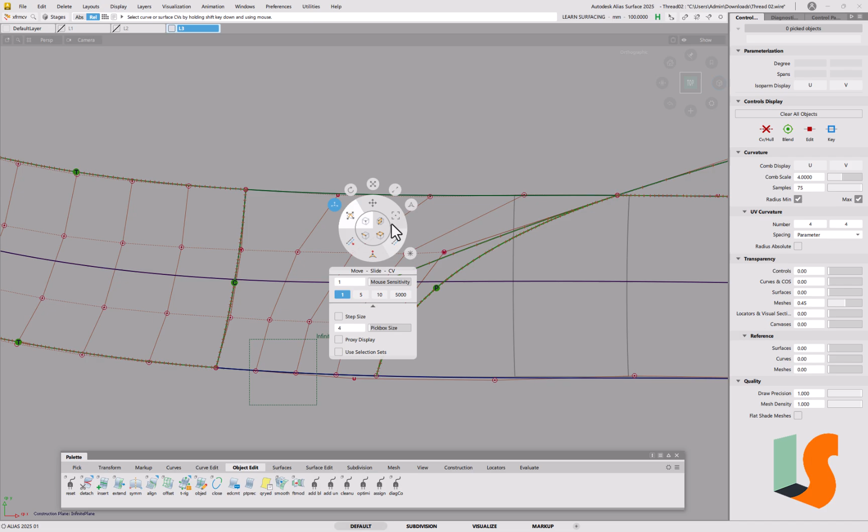Now I've obviously left history on, haven't I? Which is why nothing seems to be happening. One of the dangers of history, which is why sometimes you want to delete the history. Of course I've got to delete the history because it's now got history on it, and I want to delete the construction history there.

So sometimes history can be fantastic, and other times history can really get in the way. All I'm doing is just lining those CVs up so that they're a bit more equally spaced along there. That usually gives you a better result.

Now one thing I did mention, and it's a good job we've got this plane here, is that that curve was not aligned to this surface. I don't know whether we can see that if we shade it up, not really. But the beauty of having a plane there is I can go back to that plane, or look at that geometry from any direction relative to that plane, so that's really good. I'm now going to save this because we've done quite a bit of work and I'm not really saving it very methodically.

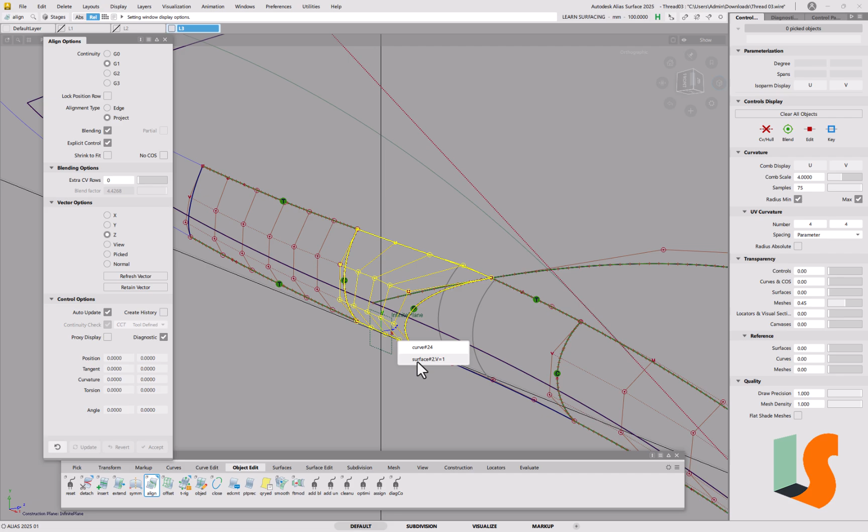Now because we've got a plane on, it makes alignment easy because we can just go into align, G1, project, rather than view. I could use view here, but if I was in that view, then I can't use view, but what I can do is use Z, Z being Z of this plane. So whether I'm in the view or not doesn't actually matter. I can just align it relative to that plane. So really handy. And the same on this side.

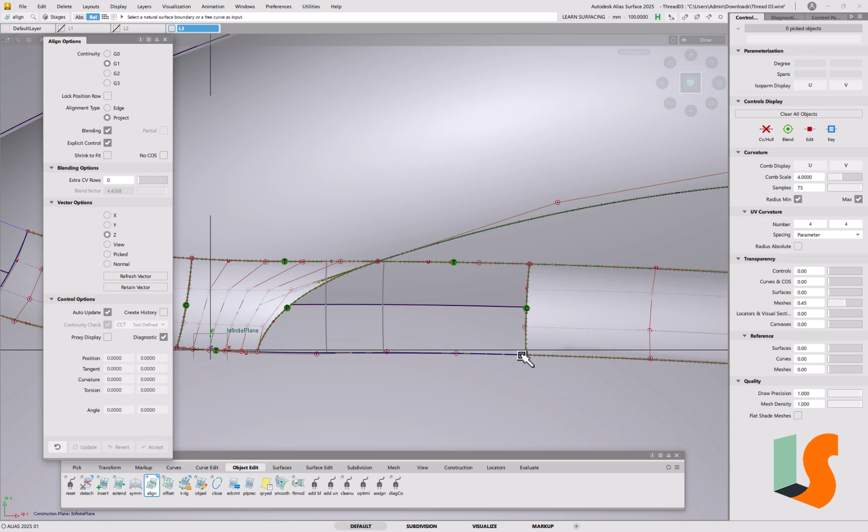Now the fact that that's failed by 0.1 of a degree is not a worry, because we've got a fairly low degree here, so we can just increase the degree, and there we are, degree 5 has done it. Now let's have a shade of this and see what we've got. We've got this space here, a curve down here, curve up here, edge, edge. So we've got enough to put in a surface there.

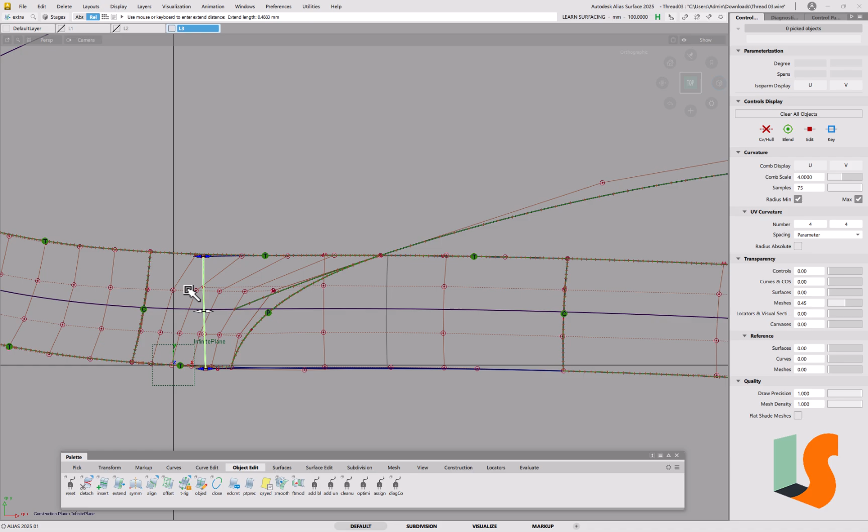There's two ways you could do this. I could just go back to my template and just do this. We know that's aligned at the top edge, so I think I will do it this way. The other way would be to use square, but this is probably better because I'm using the original surfaces. Now we might have to change this edge here. I've sort of aligned it to that curve, but that might change because the CVs here are quite different to the CVs here. Or we might just align this into there. It all depends on what looks best really.

So with this surface in here, I'm going to increase the degree. Let's make it 5. It's guesswork until you actually try to align it; we don't know what degree we need here. Again, rather than view, I could use Z of that plane. Being in the view of that plane makes no difference at all. You can see the CVs of that are slightly different to the CVs of that curve. I'm going to get rid of that curve because it's going to add to confusion here.

So let's go into Object Edit, Align, G1 Project. Don't want blending on. That's another thing that can catch you out if you've left it on from last time, and then you think, what's going on? It may be that you've left blending on. Also, I want to get rid of that curve, and I'll get rid of that one as well.

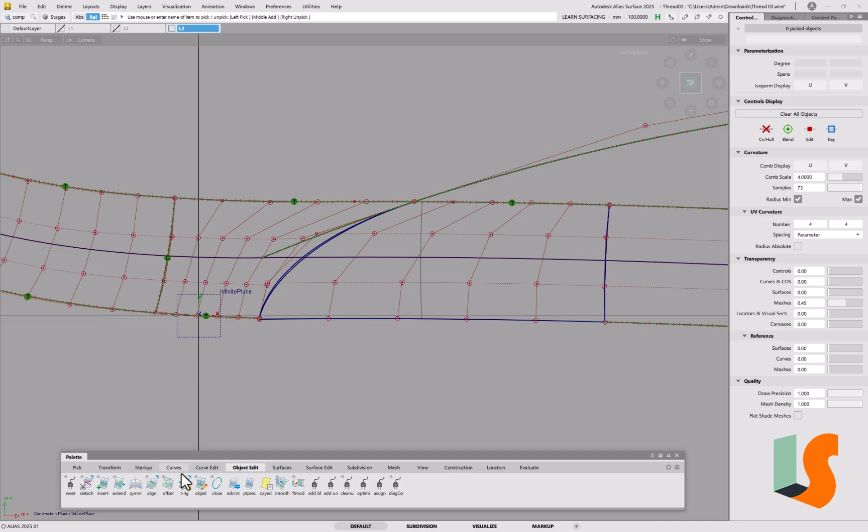So let's align that. So we're going to align it in Z now. I guess the other thing is, of course, I forgot that I've extended that surface, but of course the lower edge doesn't join up with where we are. So actually, we don't want to do that. So let's revert that, and first of all we've got to align this in position to that end. So

now I'm doing it in position to start with, so I've got project on. It's given me an error, and I don't want project on anyway. Always want position on, always on those ends. Now I've put position on. I'm going to then see G1, see what that gives us. I'm not interested in whether it aligns or not. I'm just interested in the... So I'm actually going to take the diagnostic off for a minute.

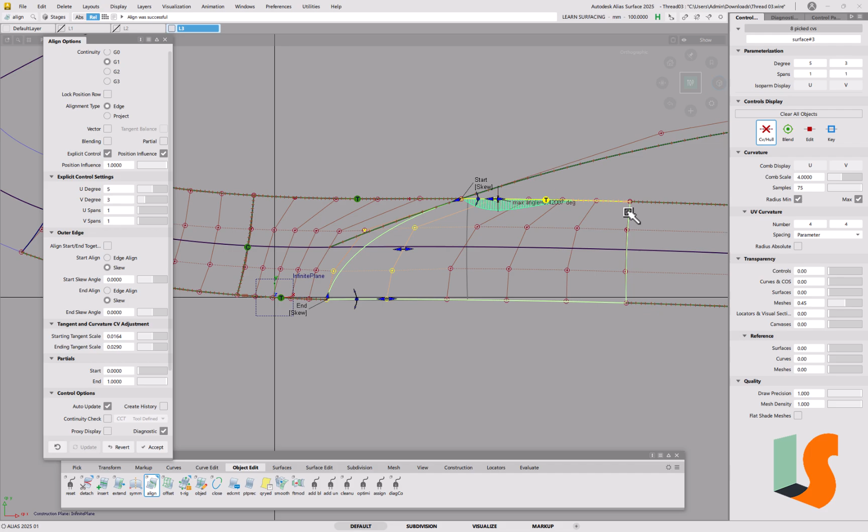Oh, sorry, the continuity check there. Diagnostic is to tell you the deviation between that and the original when you've got the original on. So I'm putting G1 on just to see what happens to these CVs really, and they seem to be okay. And I know there's errors popping up, but that doesn't matter. You know, we can use non-proportional scaling if we want to, if we're interested in really looking at the quality of those CVs.

And of course there's a bit of tidying up we could do on the CVs. I would say that this point actually ought to go up a bit so that we get a better flow of CVs across here. Also, well actually before we do that, I suddenly noticed that we've got skew on here, and that was probably from last time, or it's decided that it wants skew on. Now why is it not updating? Because I've got auto update on. That's better. So you can see that that's pointing downwards there.

Now what would be useful here, so this one doesn't look too bad. I think that point there could come down a little bit, but that looks okay. It has to S from that position to this position. It's got to do it somewhere, so that's fine. This one just goes bleh. It doesn't look very good at all. Blend would spread that a bit. We could spread it onto those points, but I don't think that's going to help either. I think this actually needs to go up a tiny little bit, because we're aligning it in tangency to a very small surface. The smallest error there will have a big impact on this side.

If I put create history on, and then we go and move CVs around, so I'm going to put on quite a lot of mouse sensitivity, 10, and I'm just going to move that point because that looks a bit high anyway. You can see that point comes up, and I only have to move this a tiny amount for that to be better. The fact that the tangency is improving there is just weird. Useful but weird. It's good, but quite strange.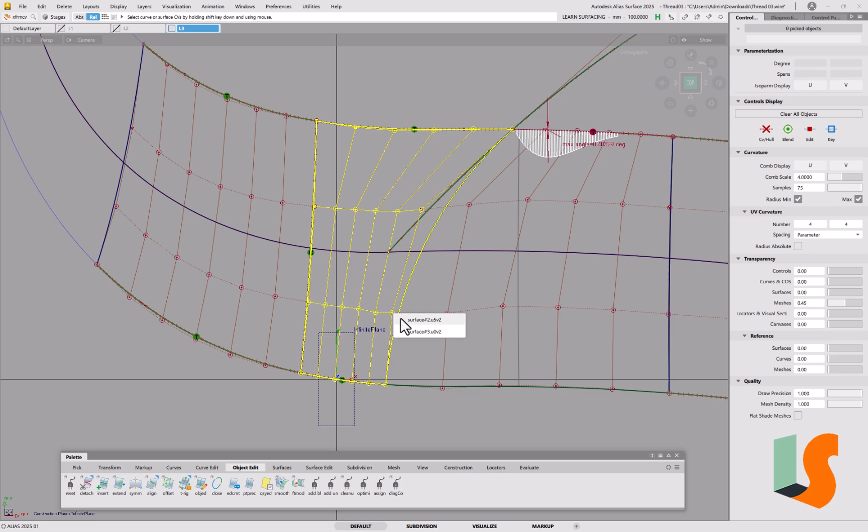I think this one's now probably about as low as it wants to go in terms of the angle, but if you look through there, I think that point, make sure I pick the right surface, needs to go up a bit in terms of looking at that in relation to that. Now I'm not really looking at the right hand surface, but I can see that that's gone a bit too high. So bizarrely, that's given us tangency matching.

There is no logic to that whatsoever, because the system's obviously doing a recalculation every time, because I've got history on there. So it must be moving this CV around by a tiny amount, which is not even noticeable. Because normally if I'm working down here, you would not expect that to change at all, or the tangency to get better. Now I want to bring that up, just so that the flow of CVs across there looks better, and I think that's it.

Like I say, you could tweak these if you wanted to, because that one looks a bit high. I'm moving it by sliding it along the hull there between those two CVs, because that affects the tangency very little when you slide that along.

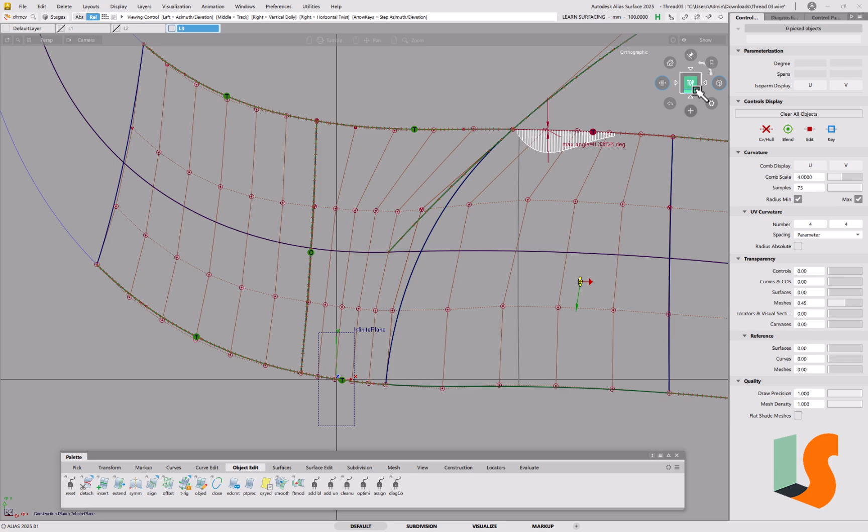As long as you slide it along that direction, not that direction. So I think that's more than good enough for what we're doing. So I'm going to come out of non-proportional view. Now that's not aligned, but it doesn't worry me. It's a small angle change.

So we can now go into align. This one we've got a curve on surface, so I will go and try and use edge here, and I'm going to put vector on. Very important. We try and keep these CVs relative to this view all the time now. So it says there's history involved. I want to get rid of the history.

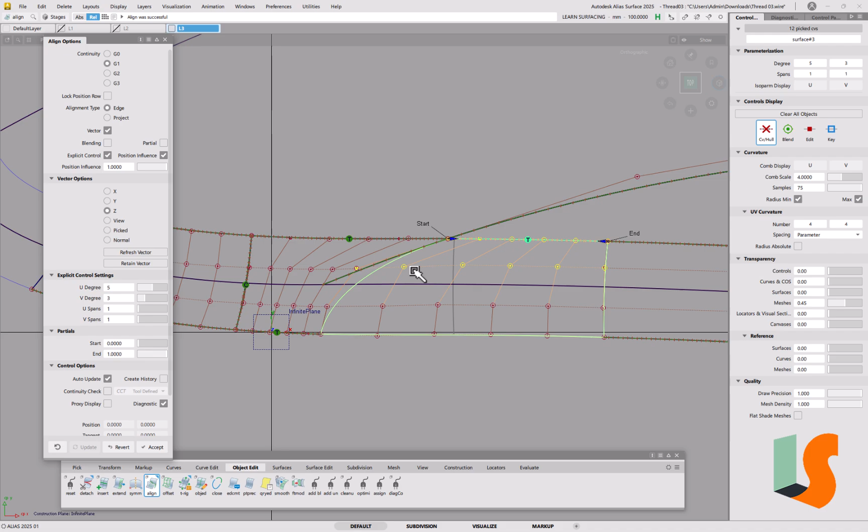Actually, let's just go and pick all of those surfaces and say delete construction history. Otherwise, that gets us into trouble 9 times out of 10. You know, if you want the history on, then it's good, but not when you don't. So edge, vector, Z. So that means those CVs are only moving in and out of the view, or the Z direction of our plane.

Let's go and put surfcon on there. Now this one definitely isn't aligned. I know that. I know I was aligning that in tangency that way, but normally you would do it the other way, and I was only doing that because I couldn't be bothered to do it the other way. There was no real logic to it. I could have done exactly what I did before by moving that point rather than that point, probably a better solution, but I chose to do it that way.

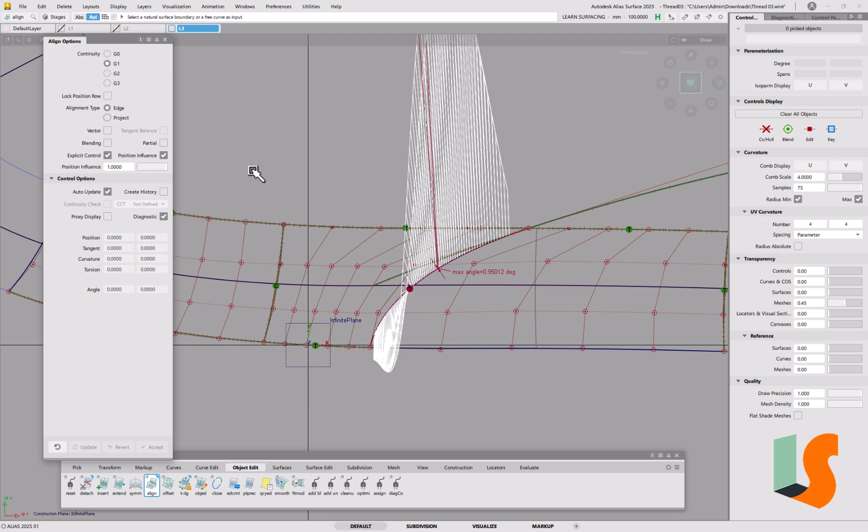But if you're actually trying to get this alignment in, so that's the only edge that hasn't got alignment on it, then you want to align this to that. It's always the best thing to do, to always align the small surface to the large one, unless there's a reason otherwise. Now on this one, again, as we've had before, the angle goes out here. This isn't aligned by 0.14, that's 0.26. So they're quite small values, and they should disappear gradually as we chip away at this.

So let's first of all increase the degree. We could increase it to 7. There's no reason why not. But having said that, it didn't seem to make that much difference. So what I could try is increasing the degree the other way, because often these little surfaces need this. And we could do it in both directions. You can see if I make that 7 by 7, we're very, very close actually.

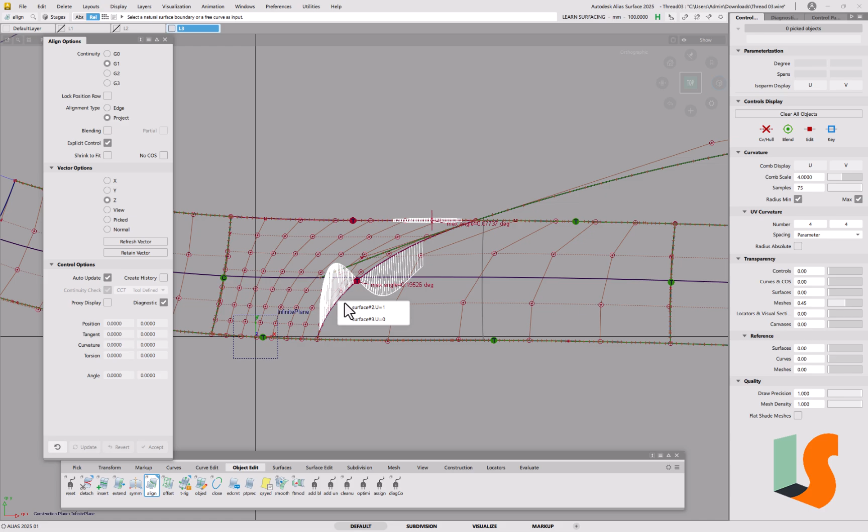So that might be, given that we've got G1 there and G1 here, I've just made a mistake, haven't I, here? I assumed it must be aligned, even though I haven't actually looked at it at all. I need to project that. So again, we use project G1 Z on here into here. I've got a continuity check on there. That's better. So let's try that again, because I forgot to actually align that edge in. So this one, I must switch to edge.

It was strange because that was still tangency there, which is odd considering that wasn't tangency, but it's another strange thing, much like when I was moving that point down here and this tangency improved, which made no sense at all. But we're always happy to take those strokes of good luck. You can see the angle there is 0.07, so it's nothing. It's always best to have the smallest degree you can, and I'm just wondering whether we could, only because if you want to change anything, but I think we'll just go with 7 by 7.

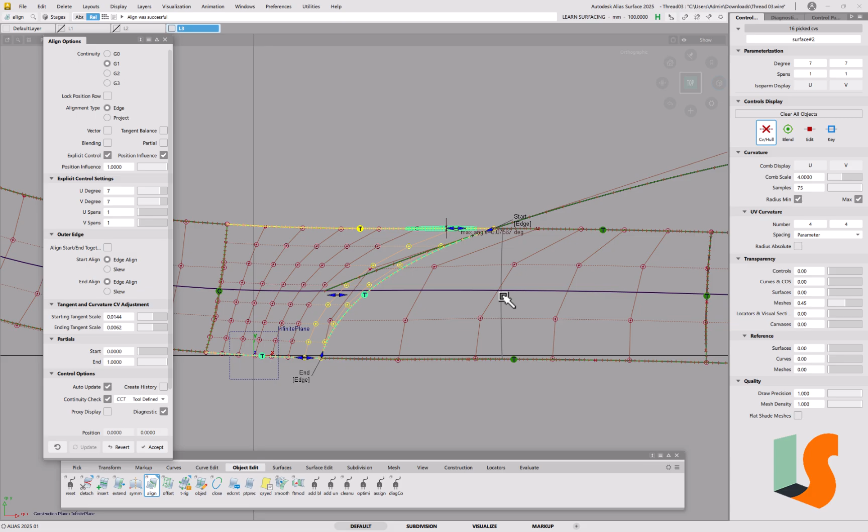I think the key thing is that because we've only got tangency here and tangency here, not G2, normally if that was G2 and that was G2, I'd pretty much expect that to be degree 5 across there and have no problem. We probably wouldn't need to increase the degree, but here, because we've only got tangency there, I think it's perfectly acceptable.

So this one is so small. Now this is where you have to make a judgment. Should we divide this up? Should we make this smaller like we did the other one, or should we manually move it? I think sometimes people are scared of manually moving CVs around, when in fact, if you get used to the idea, it's not that scary, and sometimes it's the quickest way of doing anything. So I'm going to put loads of mouse sensitivity on. That's probably a bit too much. Let's make it 1000. And this is all guesswork.

If you want to move that point, just see what happens. So I need to move that point. That's where it's telling me the error is, and of course I know that's probably going to break the tangency that way. But if I've got a very high value in there, I'm only moving a tiny amount. So I move it one way and it's increasing it. I move it the other way and it's decreasing it. And hopefully I'll get down to 0.05 without affecting the other side.

Now you can see it's just broken there. So let's just undo that. So I'll just use Control Z. I'm just going to go to this next point, which affects that side but doesn't affect that side, and see if we can get rid of it that way.

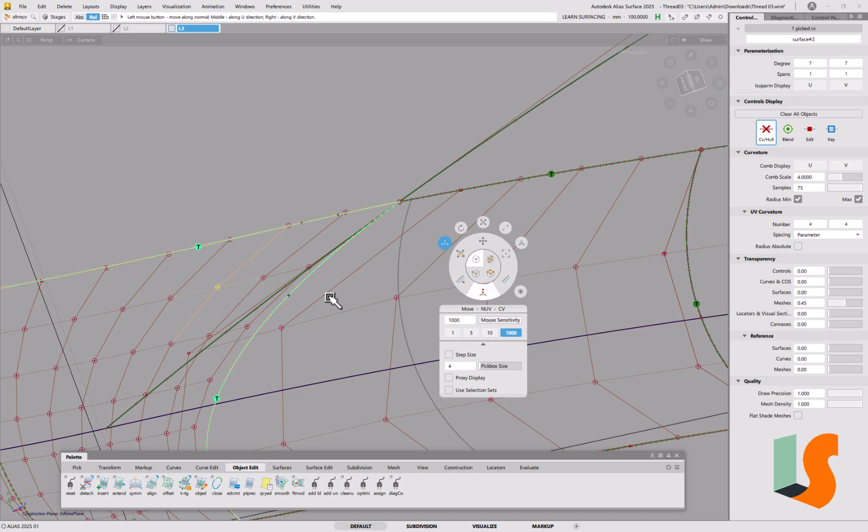You can see that's, you know, I could have done a lot more work of detaching those and then realigning it. If you get used to the idea of moving CVs sometimes to get these final bits down, then it's so much quicker. I mean, if that angle was like 3 degrees, no way would I be looking at moving the CVs. But if it's like 0.1, 0.2 maybe, then I'll look at the CVs, see if a few short, quick movements of it look like it's going in the right direction. If I think it's good, maybe increase the degree if you can, then that's what I'll go with.

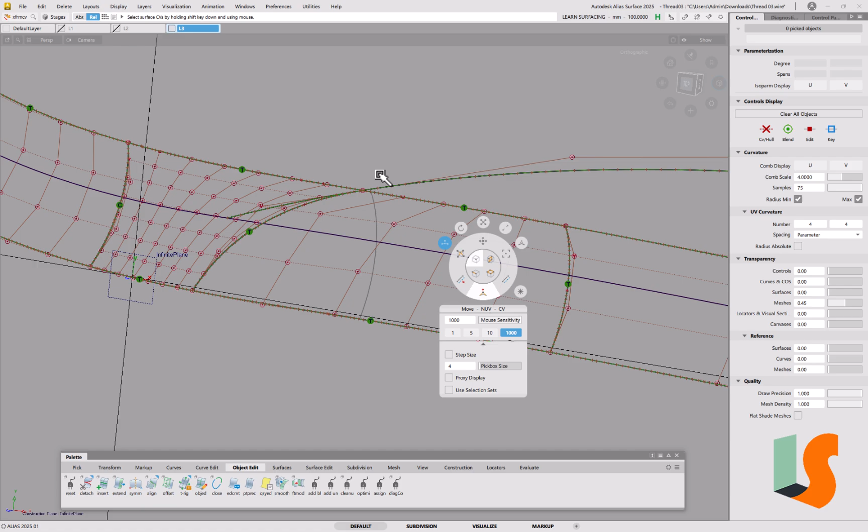And there we had such a small degree, 0.07, that it was no question really that that was going to work. Now the other thing that we'll notice here, or hopefully we'll notice, is that if you remember the one at the top that we did, which I think was L2, probably not, I think my numbering of layers was wrong. This one, if you recall, as we go over this junction where the angle comes off really sharply, our CVs are doing this sort of thing, which is not nice. Doesn't look good in the highlights.

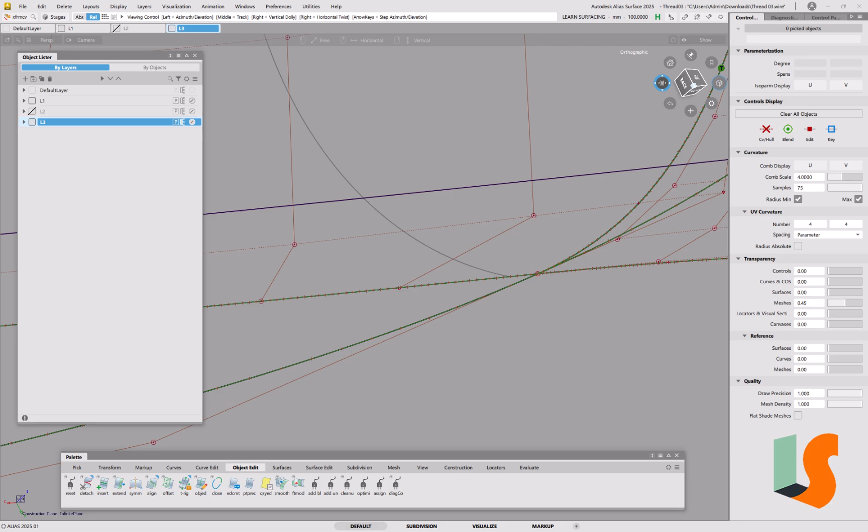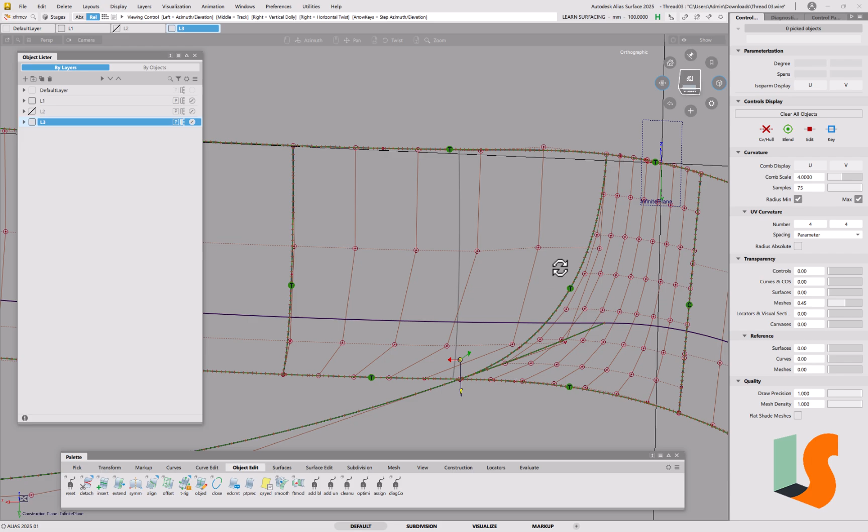Now this one should be better. Might not still be perfect because I've not looked at those CVs, but actually let's squash that up and let's have a look at that a bit in more detail. So you can see those CVs look pretty smooth. That does go up a little bit, but I think that's all down to this tangency thing, and we could improve the CVs if we really wanted to. Depends on how important that is to the job that we're working on.

But what we should also find then, as a result of the CVs being tidier, is that our highlights going across there should be better. So you can see that that looks pretty smooth. Although I haven't actually even tried to align that in curvature. I mean, it could be possible. Probably unlikely. Well, you can see the curvature here, where we haven't got any spikes. That's saying that's okay, apart from that end spike. So actually, all the way along here, which is what we're seeing in the highlights. Actually, the highlights look pretty smooth across there.

This break here is because we've got tangency only, so that's what you always get. Where you've got curvature alignment, you always get smooth highlights. Now this one says it's within tolerance, but there's a little tiny step in it, and it's just to do with the accuracy of the diagnostics at this level. I think if this geometry was bigger, because this is tiny geometry, then you'd expect the graphics to be able to cope with it. But when you get down to this scale, sometimes the graphics doesn't show you exactly what's there, but the fact that it says curvature continuity means that that's pretty much curvature aligned.

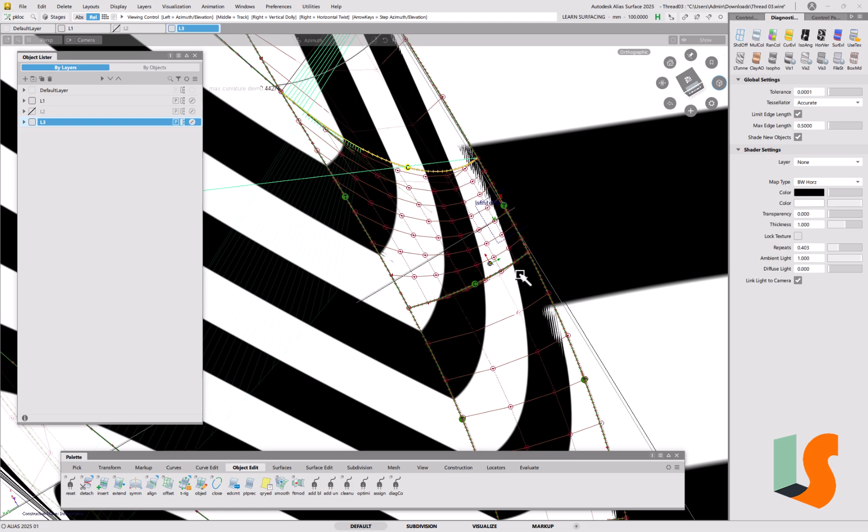Of course, the tolerance we are working to is 0.1 for curvature. If you set it to 0, then that wouldn't be green, and if you could make it green, then your highlights would be absolutely 100%. But 0.1 seems to be the industry standard. I've not worked anywhere where that isn't the case. So this is definitely the solution to go for, rather than the other option, if we can. So I'll just change that to tangency. I'm just going to save that.

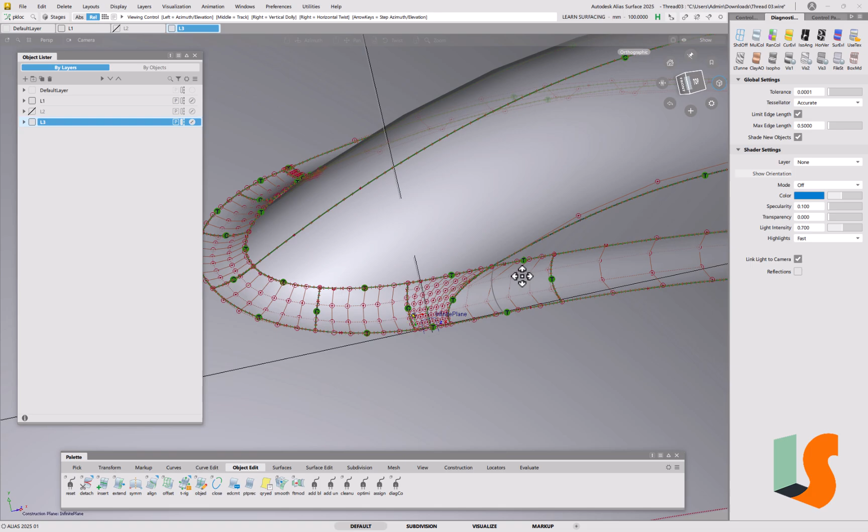But as I say, sometimes the angle there, this one we could have done exactly the same with, but I just wanted to show you how difficult it is if you don't do that, and how relatively it's a little bit more construction to build that, but you just get a better result.